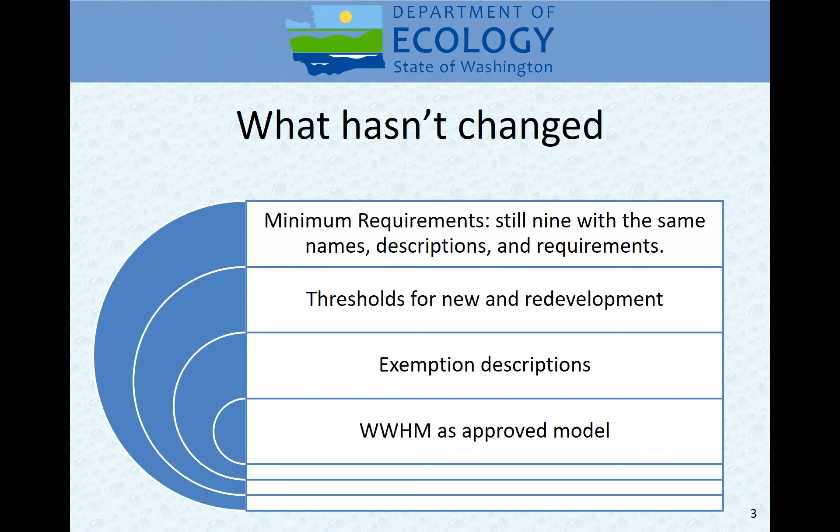What else hasn't changed? Our runoff treatment, flow control, BMP design criteria. You still have to have a swale that's 100 feet long. You still have to have a wet pond with the 6-month storm storage volume in it.

The side slopes have to be the same. You have to have the 2 different basins as you're dealing with that. We have not changed those things. We haven't changed it for bioretention, we haven't changed it for permeable pavement. Those are all the same.

The location in the manual where those are described has been changed for many of them. We did have cases in the 2014 manual where you'd go into volume 3 and look for a BMP, and it would say go to volume 5 to find the design criteria for this.

And other BMPs, you'd go into volume 5 and it would say go to volume 3 to find the information. We have eliminated that. We now have all the design criteria for all the BMPs.

Flow control and treatment are all in volume 5 now. Volume 3 talks about how to select BMPs, not how to design them, but how to select them.

And how to do the hydrologic analysis, how to run WWHM, what the different design storms are, that kind of information. So the BMP design criteria is in volume 5 now.

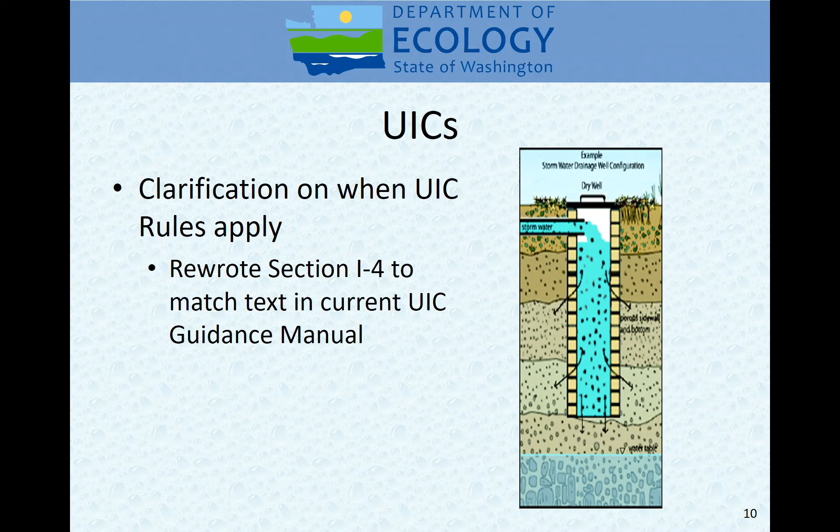In the edits we've done here, we've identified how you determine what level of treatment you need before a UIC, because we're not doing minimum requirement 6 for treatment—we have to do treatment some other way. We've done some pollutant loading and treatment capacity combinations, because that's what determines how much treatment you need.

We've also looked at the fact that if we put UICs in areas with public water supplies, we may be contaminating those supplies, and the Department of Health doesn't like that—nor do the public water suppliers. So we are putting in some requirements to help protect drinking water.

So the location of UICs is being controlled, particularly the deep UICs—the ones that go through that impermeable layer into the lower vadose zone. We're looking very carefully at what happens there, and these have to be registered with Ecology. Mary Shaleen-Hansen at headquarters is the Ecology lead for UICs, and all UICs being constructed in the state of Washington have to be registered through her. She reviews your UIC registration application.

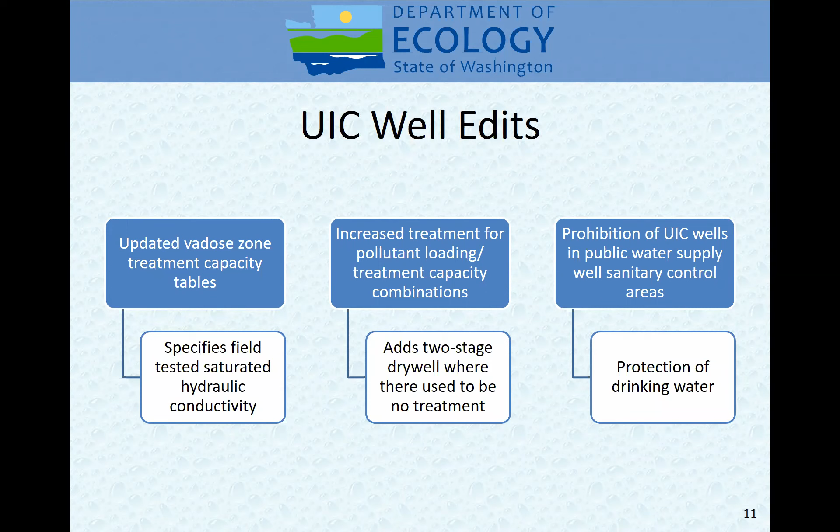So for deep wells, we've gone to great detail to make sure they're fully specified. We have a group of people that meet regularly with the Department of Health and other concerned entities to make sure everyone is happy with the rules we put in place for UICs. These rules may get adjusted as time goes on to better protect groundwater, because we don't want to contaminate groundwater with stormwater. So we're doing lots of things to make sure we're meeting those requirements.

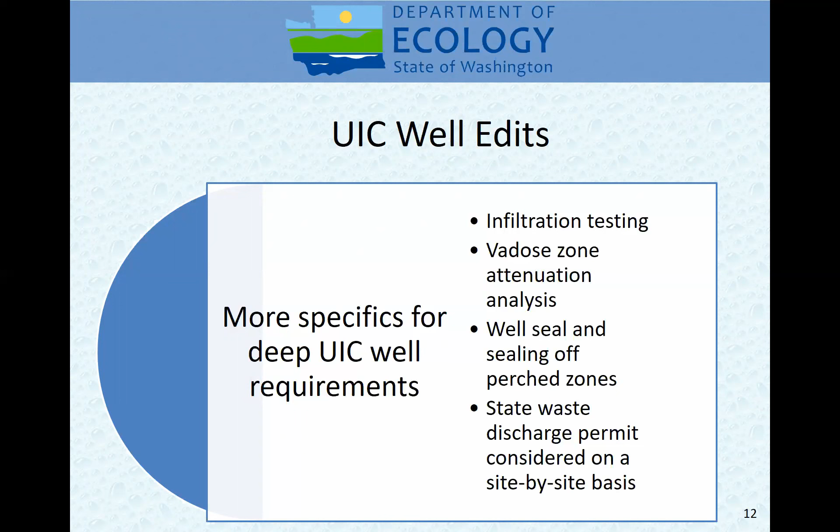If you want to build a UIC, you need to register it, and you need to apply for registration at least 60 days prior to building it. The old rule allowed them to build it and then apply, and that's too late for us to stop it. So now you have to apply up front. And if you have a deep injection well, that means there's going to be a conversation with Department of Health and any concerned water purveyors that may be down gradient of that well, so we need that extra time to do our evaluation.

And we have an online search site to help you identify where you may have problems with UIC wells.

So why are we doing this? We recognize there's confusion between the rule and the manuals, and we wanted to clarify that. We want to better clarify when UIC guidance is needed. Industrial permits refer to the manual, and industrial permittees use UICs, but they didn't refer to the UIC guidance document, they referred to the manual. So we needed to have it in the manual, if nothing more than saying here it is, you have to go look in this place for the guidance. We felt it was better for us to put it in the manual, and so we can now eliminate that guidance manual.

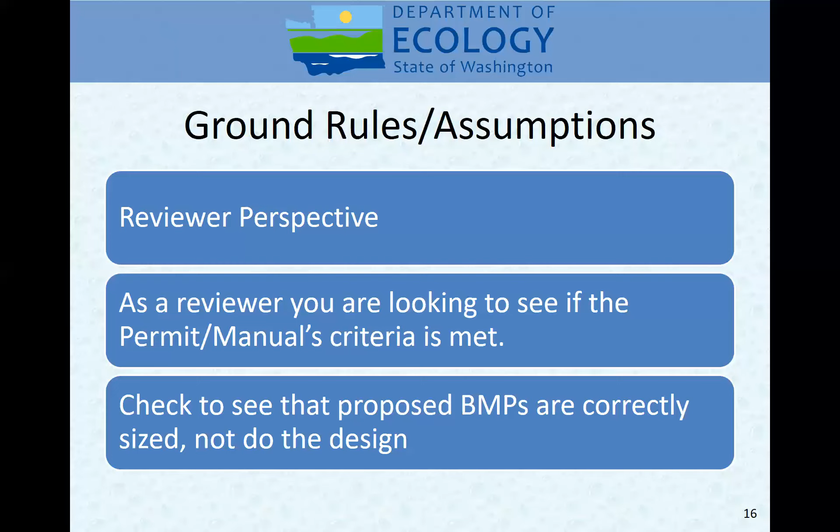And this development causes problems with streams, water quality and flow. It erodes the stream sides, it puts pollutants in there, it brings pollutants in to kill the salmon, which in turn can't feed the orcas, which alarms people across the country that our orcas are dying, and we want to stop that from happening. We want to do everything we can to stop that from happening. What we want to do is make things look like it was pre-development.

We know we can't do that completely, but we are doing what we can by controlling new development and redevelopment to the extent we can, and by having grants within ecology to jurisdictions to build runoff flow and treatment, water quality treatment BMPs on areas that currently are developed but don't have those BMPs.

And what we are focusing on primarily is trying to get as much water back into the ground as we possibly can, as close to where the rain falls. So we are focusing back on the site of development, and we're trying to get new development and redevelopment to infiltrate runoff on their site.

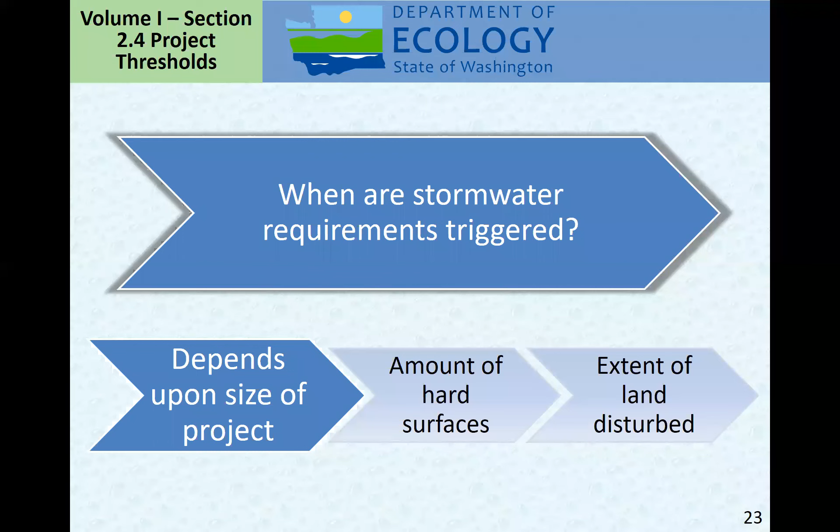The amount of hard surface is what you use for the size of the project and the extent of land disturbed. So if all you're going to do is cut down 3 acres of forest, you're exceeding the minimum requirement for new development, and you have to meet all 9 minimum requirements for cutting down those 3 acres. You don't have to be putting down impervious surface to trigger minimum requirements—you may get there just by doing some permeable products.

Now if it's a new development, you look to see if you're adding 5,000 square feet or more of new or replaced hard surfaces. If so, you have to do all 9 minimum requirements for all the new project surfaces.

If no, here's where we look at the permeable surfaces. If you've converted 3/4 acre or more of native vegetation to lawn or landscape, or 2.5 acres of native vegetation—forest, for example—to pasture, which is essentially what you'd do when you cut down trees, you answer yes, and you have to do all 9 minimum requirements.

If it's no, now we're looking to see if you have more than 2,000 square feet. If you're between 2,000 and 5,000, you have to do minimum requirements 1 through 5, not 1 through 9. And if you don't have that 2,000 square feet of land disturbing activities, you only have to do minimum requirements 1 and 2.

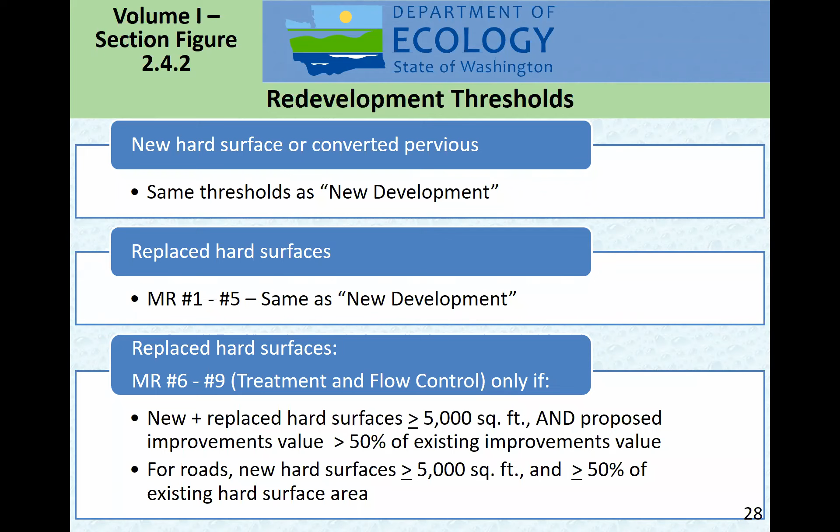Confusing, hopefully a little less confusing now. Questions on how you select minimum requirements?

And Doug, there are a couple questions in the Q&A box. Okay, you want to read them? Yes, first one actually goes back to UICs.

It says, are all sites that fully infiltrate required to obtain a UIC permit regardless of dimensions of infiltration facilities?

If you are installing a UIC, a dry well, or an infiltration trench, or storm chambers - those yellow half cylinder chambers that you can put under a parking lot that infiltrate through the bottom - those are all UICs. If you're installing those, you must register the UIC. Approval of those UICs as flow control.

What we're suggesting to jurisdictions is that even if somebody is planning to do 100% infiltration with flow control using UICs, the jurisdiction should review that submittal, because if the UIC fails, the jurisdiction is going to receive water. So we want to make sure the jurisdiction knows where UICs are being installed and is aware of the potential for having to deal with overflow. But registration is required for UICs. Hope that answered the question.

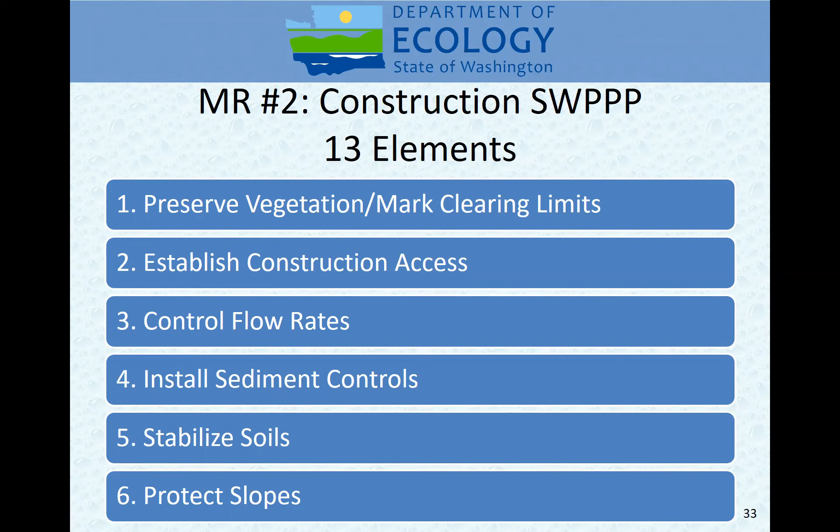You need to control flow rates within the site and off the site. You need to control sediment. The construction permit is primarily dealing with turbidity, with dealing with sediment in the water leaving the site. So you need to be worried about the movement of soils. So you need to stabilize soils, need to protect slopes to make sure they don't go anywhere.

Drain inlets that are on the site, so that there's drain inlets being built for that project in a subdivision. Those need to be protected from getting silt to them during construction. Or if it's off-site and water's draining off-site, the catch basins off-site need to have protection. The channels and outlets need to be stabilized so they don't erode.

Controlling pollutants is some source control type things, making sure that if you have gas on site in tanks, that those tanks aren't leaking and you're controlling where the water is going.

If you are having to do dewatering, if you have high groundwater and have to dewater, you need to be sending that dewatering water to a safe place, whether it goes and gets dispersed out on the property someplace, or it gets discharged to a collection system, the MS4. You need to deal with that water.

Elements 11 and 12 are managing and maintaining your BMPs. So if you put them in up front and they fail, you got to rebuild them. And you need to manage the project to make sure that the BMPs for construction are in place before you start disturbing land upstream. And when we added minimum requirement number 5 in the 2014 manual, we added element number 13, which is to protect LID BMPs.

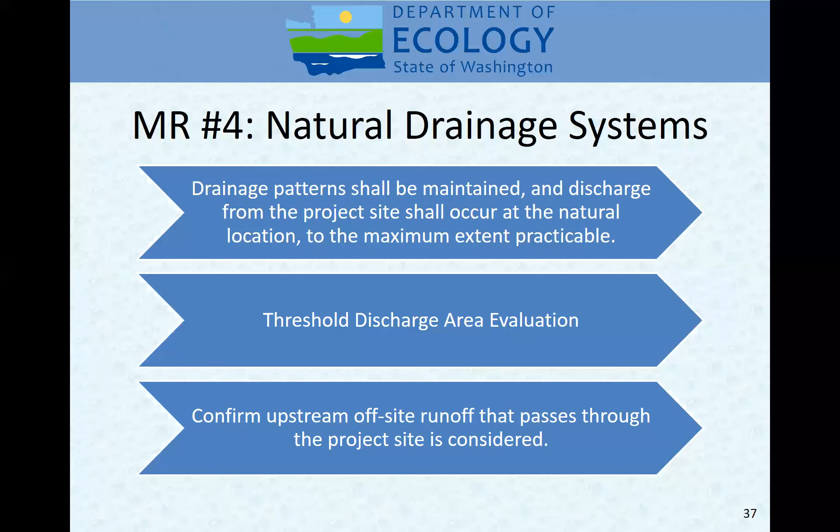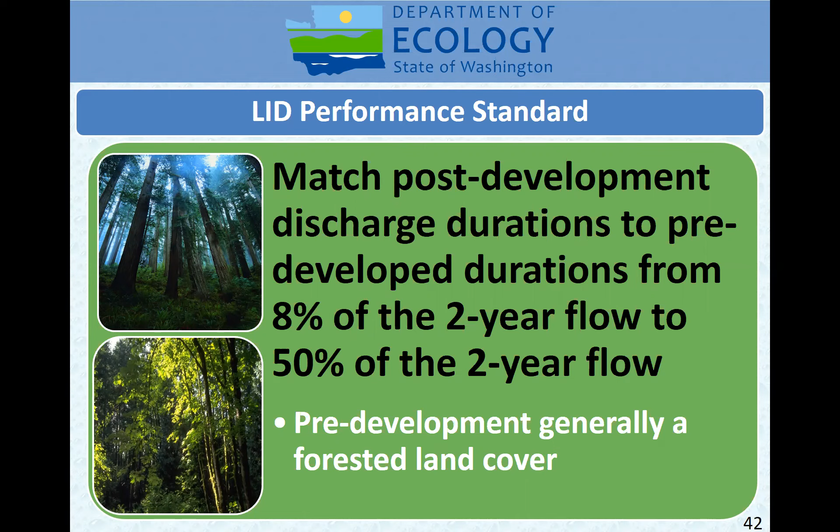So 60 years times 365 days a year times 24 hours a day times 4 time steps per hour, 4 15-minute time steps per hour, and you get multi-million time steps. And WWHM takes the pre-developed condition and calculates the runoff from the site in each of those 15-minute time steps.

And it takes the post-development runoff from the site in those 15-minute time steps. It then sorts that runoff from highest to lowest and calculates the amount of time that that specific flow rate is exceeded. So if you take the maximum flow rate, you find out that that's exceeded 0% of the time.

And then you take the next one and it's exceeded 1 over multi-million converted to percent of the time. And it works its way on down and down until it gets into this range of 10% of the time, 1% of the time, 0.1% of the time, 0.01% of the time. And it then plots that flow rate versus the percent exceeded on the graph.

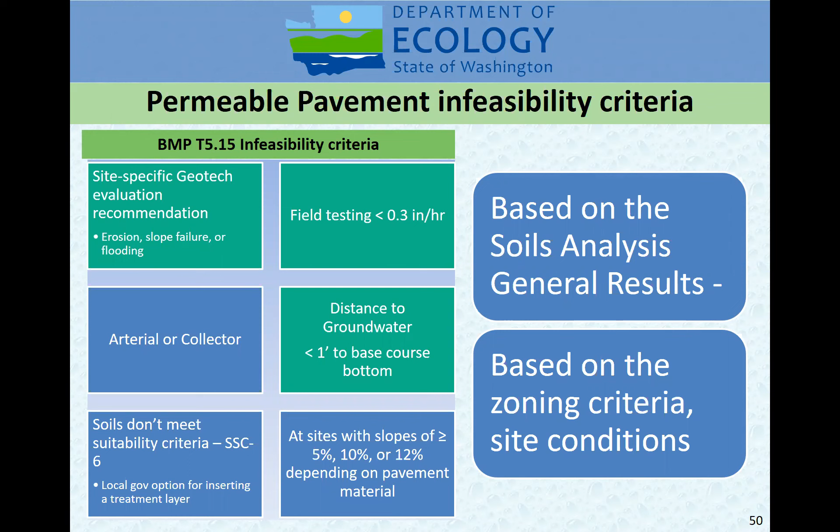And again, if you answer no to all the various different infeasibility criteria, you have to install permeable pavement. If I go back up to here, if permeable pavement, rain gardens, and bioretention are all infeasible, then you need to do flow dispersion.

So you need to take runoff from the roadway or the patio and disperse it across grass. Or you need to collect water that's coming down from the roadway, from your driveway, and collect that and disperse it across grass. Sheet flow and concentrated flow dispersion.

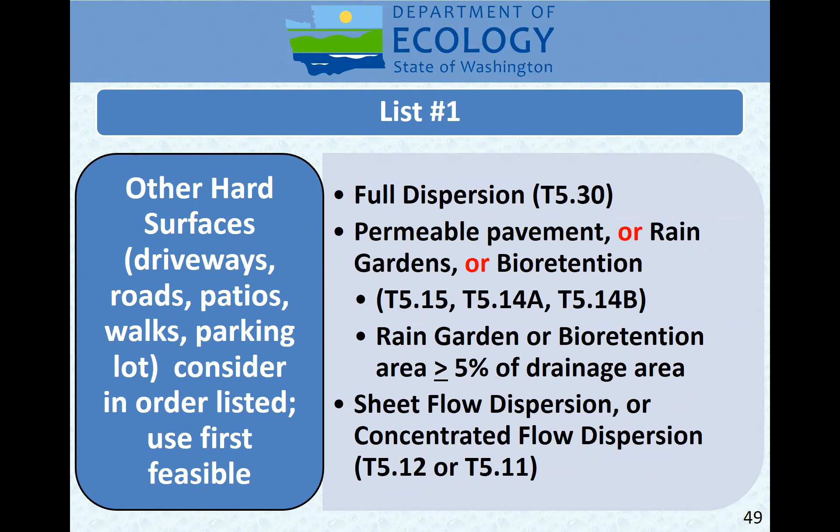Those are situations where we've put those into the manual back in 2009, but we can't take them out in the next manual. That's called backsliding. So we had to keep them in, but we kept them at the bottom of the lists so that they're still there, but hopefully you have a property that is going to do something higher up on the lists.

Now, if you have to do minimum requirements 1 through 9—I was just telling you about minimum requirements 1 through 5—if you have to do 1 through 9, there's a list 2 that you're doing. And what are the changes? It's the same as list 1, except rain gardens are no longer an option.

If you have to do 1 through 9, you have to do treatment, and rain gardens aren't designed to give us a known amount of treatment. Bioretention does—we've done tests on the bioretention media, and we know what kind of treatment we can get through the bioretention.

We don't know what kind of treatment we can get through a rain garden, because a rain garden doesn't necessarily have the bioretention media in it. You can build a rain garden by scooping out the dirt, setting it aside, stirring it up with a little bit of compost, dumping it back in the hole, and planting plants. That's a rain garden, not bioretention. We don't know what kind of treatment we're going to get from that. So if you have to use list 2, that option is for bioretention only, not for bioretention or rain gardens.

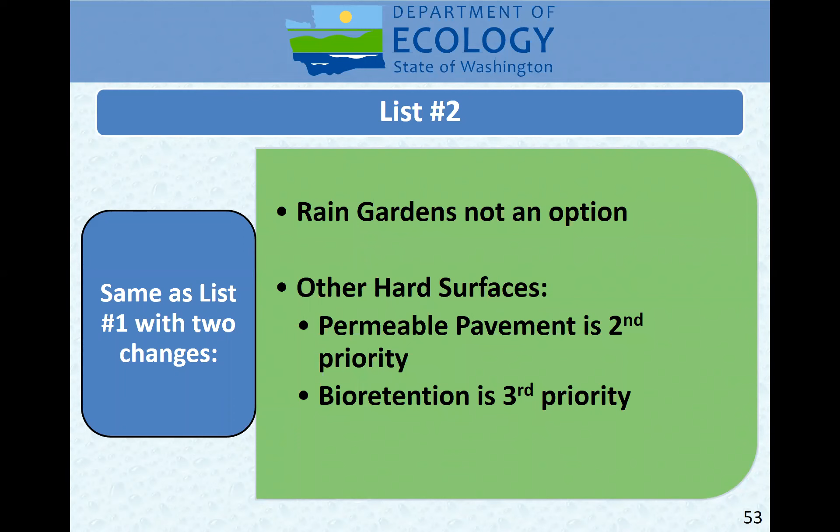So to go through the list, those same three slides I just had once before: lawn and landscape, this hasn't changed. Now in list number 2 for roofs, we only have bioretention as the second bullet. The same first bullet and same third and fourth bullets, no change. And in list number 2, other hard surfaces, permeable pavement is the second bullet by itself, and bioretention is the third bullet by itself. The fourth bullet is the same as it was before.

Now, what happens if everything's infeasible? Everything on those lists is infeasible. You have high groundwater, contaminated soils, you're an industrial site and you don't have enough room to disperse water across grass because you don't have anything there. If everything's infeasible, you're done. You've met minimum requirement number 5. You don't have to do the list option, you picked the list option and you're done. You don't have to do the LID performance standard. If everything's infeasible, you're done.

Now you have to cite the infeasibility criteria that you're using to show infeasibility. So in your stormwater site plan, there should be something that says, I can't do bioretention because my infiltration rate on my site is less than 0.3 inches per hour, and you can find that in the geotech report that I've attached. You can't just say, oh, it's infeasible, I'm done. Jurisdictions need to make sure that the applicants cite the specific infeasibility criteria they're using to show that it is indeed infeasible.

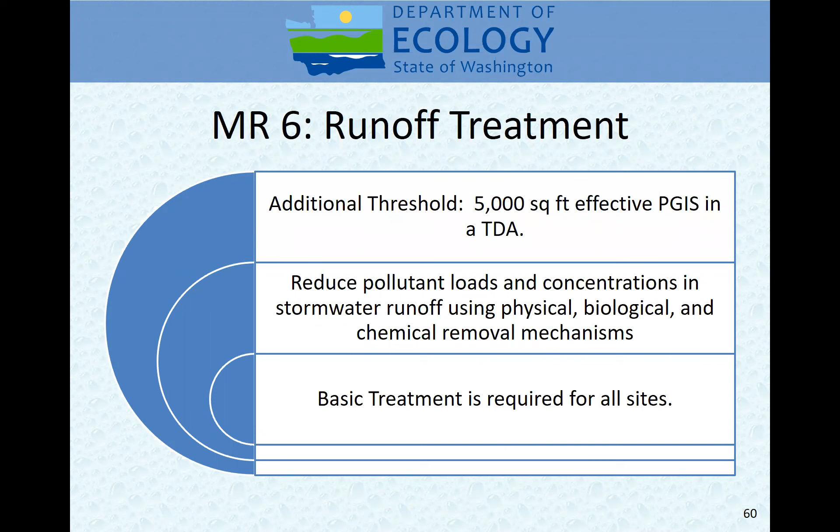Minimum requirement number 7 is the flow control minimum requirement, and it has a second threshold as well: 10,000 square feet of effective impervious surface in a TDA, or a 0.1 CFS increase in the 100-year flow frequency. Actually that should now be a 0.15 CFS increase in the 15-minute time step of the 100-year flow frequency. So those go together, the 0.15 and the 10,000 square feet - it takes about 10,000 square feet of effective impervious surface to increase the flow by that 0.15 CFS. If you exceed either of those, you have to meet minimum requirement number 7.

And these are by TDA again. So if I have 20,000 square feet of impervious surface on my property with 2 TDAs, one with 8,000 square feet and one with 12,000 square feet, I have to do flow control on the 12,000 square foot TDA, but not the 8,000 square foot TDA. But I may have to do treatment on both of those if we have more than 5,000 square feet of pollution generating impervious surface. So it gets kind of crazy.

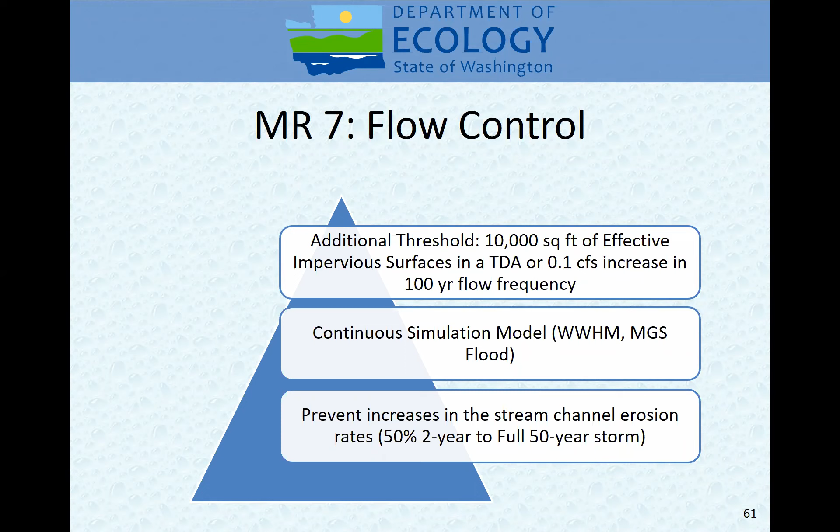Now you use a model, a continuous simulation model like WWHM 2012 or MGS flood, to analyze flow control on this process. Here we're looking at higher flows, bigger storms - 50% of the 2-year to the full 50-year storms, things exceeded 1% of the time or less. So 99% of the storms operate at flow rates less than what this BMP looks at. This is taking the top 1% of flow rates in storms - it's taking the stuff off the peak. I've got another little example of TDAs here; I don't think I need to go over that again unless you want to ask a question at the end.

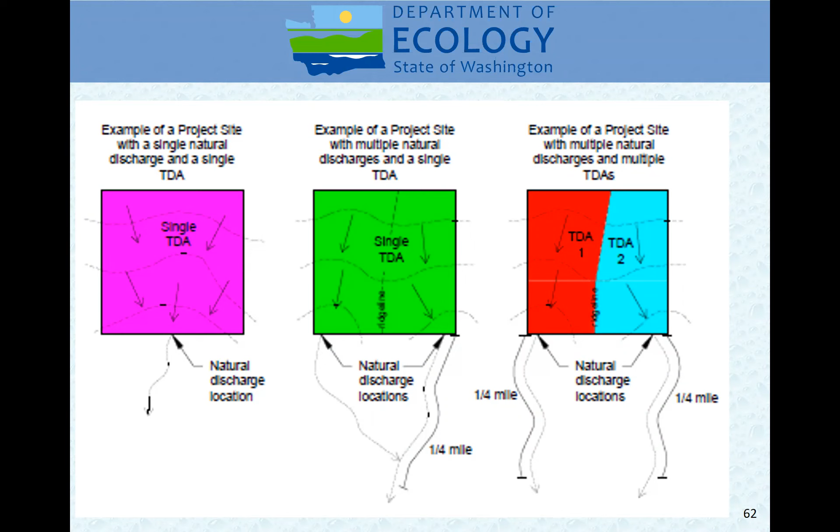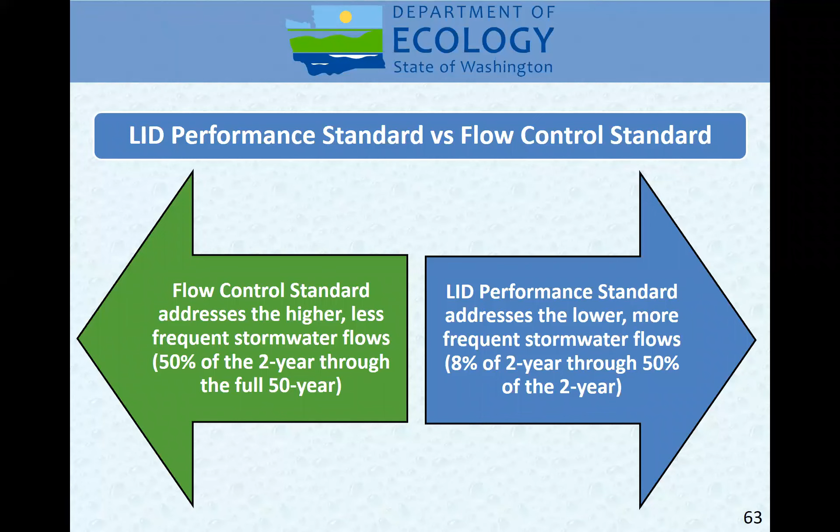So if you look at the performance, LID performance standard versus the flow control standard, there's a dividing line between the two at about the 1% exceeding point, 50% of the 2-year storm. One is 50% of the 2-year storm and lower, down to 8% of the 2-year storm. The other is 50% of the 2-year storm and higher, up to the full 50-year storm. They work together in the same model and on the same graph.

So if I was going to meet the LID performance standard and minimum requirement number 7, the entire red line on this graph would have to be below the blue line in order to meet both standards. Now it's possible to meet one and not the other. If you don't do any infiltration, you're probably not going to meet the LID standard. And if all you're doing is infiltration, you may not meet the flow control standard because your flows may bypass your bioretention if that's what you've got in place.

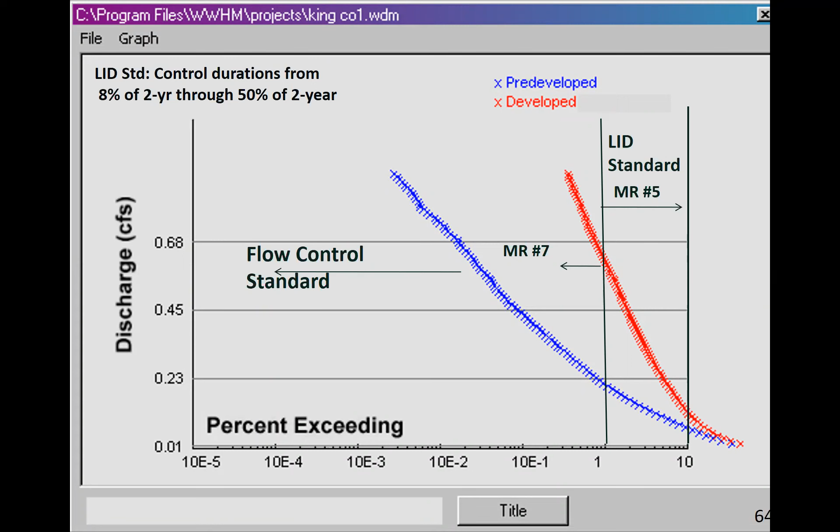So that's minimum requirement number 7. Minimum requirement number 8 is wetlands protection. You cannot use an existing wetland for stormwater treatment or flow control. You must have your BMPs outside of the wetland and the buffer for the wetland. There are some cases with low quality wetlands, category 3 and 4 wetlands, where you can use the buffer to help mitigate impacts on the wetland. But otherwise, all your treatment BMPs and flow control BMPs need to be outside the wetland and the wetland buffer.

We're trying to ensure that wetlands are controlled and get protections, because wetlands are a valuable resource here in the state. And the way wetlands are judged is by changes in volume in those wetlands. Wetlands go up and down in volume based on rainfall and the lack of rainfall. So we're asking people that are discharging to a wetland to make sure that the wetland is protected, not disturbed, and not destroyed.

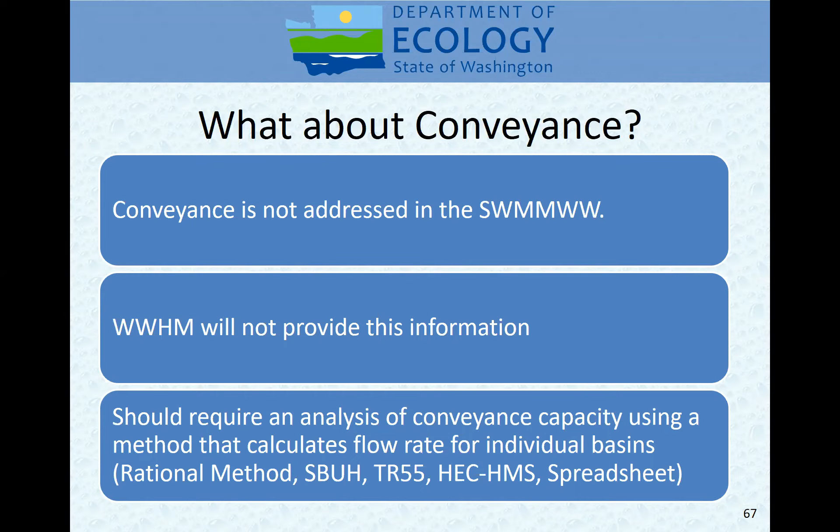Okay, questions? We have one: are there O&M requirements for minimum requirement 3 BMPs?

Yes, and those should be attached to minimum requirement number 3, not minimum requirement number 9, because those maintenance requirements are listed in the source control BMP. So they're already there - you just have to make sure that they're actually doing them.

And that was it for questions. Good question, no one's ever asked that question before. It's a good one. Thank you for asking that, whoever did. Pat yourself on the back.

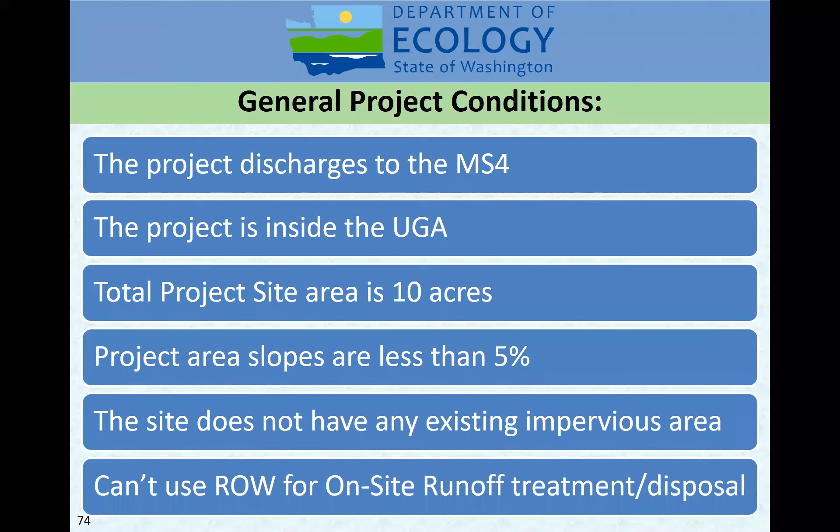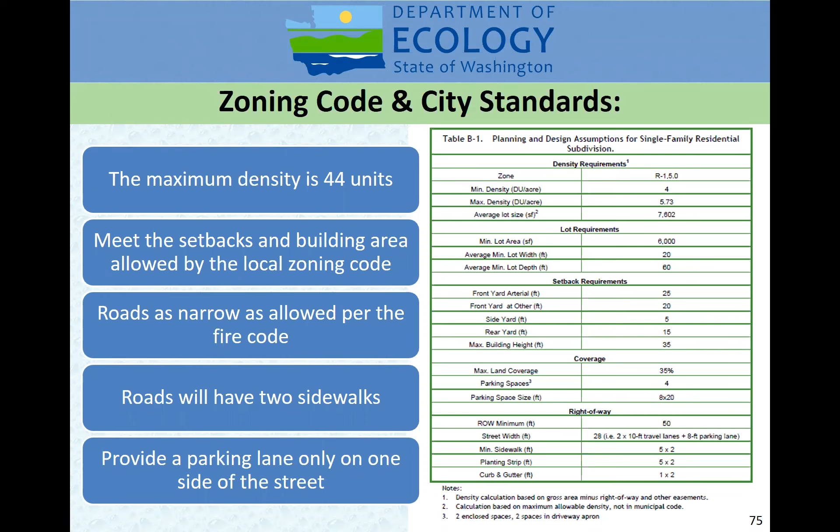Roads, I want to make as narrow as the fire code will allow. I'm going to have 2 sidewalks on my road. I want this to be a pedestrian-friendly subdivision, so I'm putting 2 sidewalks in, and I'm allowing a parking lane on only one side of the road. So 2 lanes for cars to travel, sidewalks on both sides, and a parking lane in the road. So my street width is going to be 28 feet, 2 10-foot travel lanes and an 8-foot parking lane. And I got sidewalks on each side, a planting strip and a curb and gutter to fill my 50-foot right-of-way within my subdivision.

And so now I've had my geotechnical people go out to the site, and they've done the thing that they need to do, and they've determined that the infiltration rate on the site measured in the field is about 0.3 of an inch per hour, 0.3 inches per hour, silty soils. And they did some additional tests, and they found that the existing soil meets the site suitability criteria. They tested the soil and found that there was 5 milliequivalents per 100 grams of soil for cation exchange capacity. And they also found that there is adequate compost in the soil, organics in the soil, to meet the site suitability criteria that's listed there.

And because the infiltration rate's 0.3, it is low enough, so the water will not go through the soil so fast that it won't have time to come in contact with the organics or the cation exchange capacity. And depth of groundwater, they did drillings and they stopped at 15 feet and found no indication of groundwater within that 15 feet. So I've got more than 15 feet below ground surface.

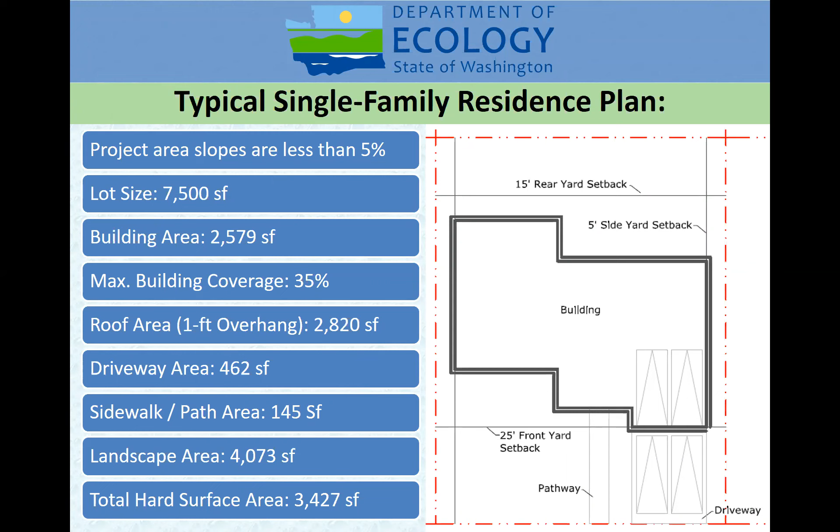And so now we're going to move to the next step and identify the minimum requirements. The first thing you need to do to identify the minimum requirements is get your numbers of areas - how much new and replaced impervious surface you have, and what's going on.

And so I'm taking from that previous table. I've got my per lot numbers here of landscaping and rooftops and driveways, sidewalks and paths. I'm going to multiply those each by my 44 lots to get a... excuse me, I've got a cough here. Had to go on mute so I could cough and not knock all you guys' headsets off.

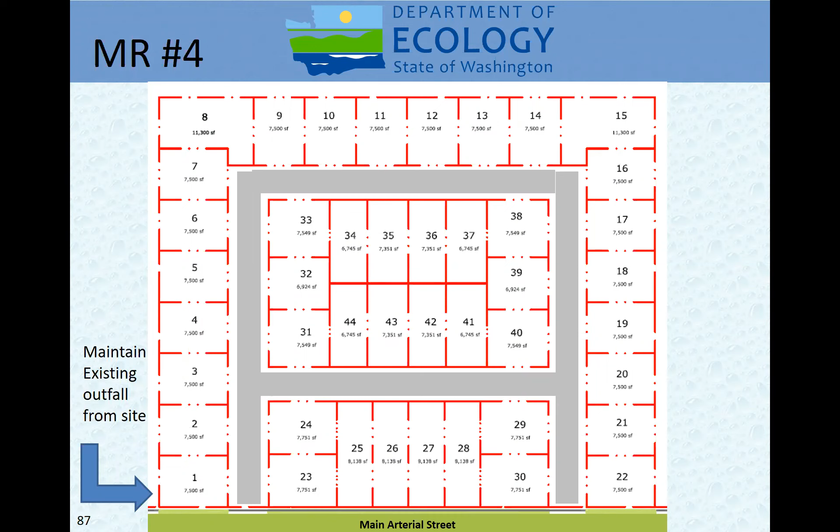So now let's get into the technical side of this. First question: you need to start asking some questions about minimum requirement number 5 before you start putting minimum 5 together. First of all, is the LID performance standard required?

That's required on projects that are outside the UGA and are on 5 acres or larger. So if you are on a project outside the UGA on 5 acres or larger, then you must do the LID performance standard—the list option doesn't count. King County has done some pre-sizing for properties outside the UGA and on 5 acres or more. They've done some sizing of bioretention that meets the LID performance standard, which is larger than the 5% we're asking for in the list option.

So people can meet the LID performance standard without having to run the model, because King County has already run the model and identified how big the BMPs need to be based on how much area is draining to that BMP. They can size it, and the size they build it will meet the performance standard. So there is a way of dealing with this without having to get an engineer involved on these properties, but it takes some effort on the jurisdiction's part.

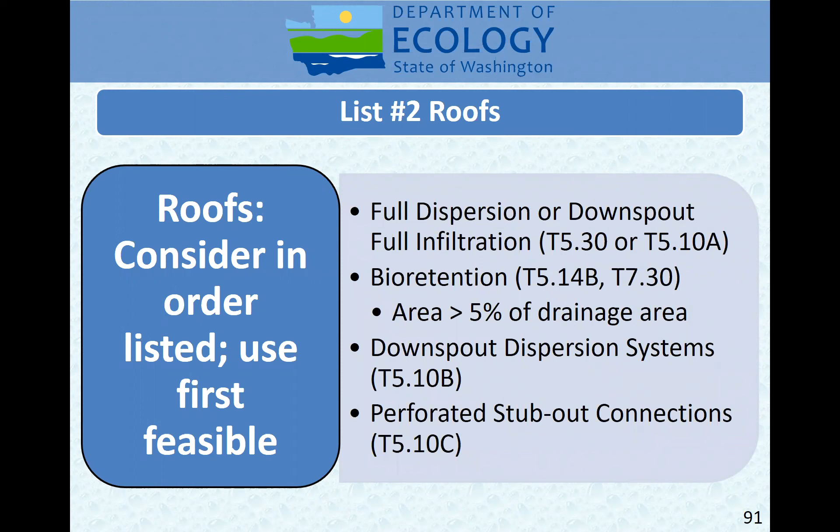Now we've set that aside, gone over it, and put a sign on the wall. So, lawn and landscape: we're doing soil quality and depth. For roofs: we're doing bioretention. Now, continuing list 2, for other hard surfaces, we're not doing full dispersion.

The next item on the list is permeable pavement. Is permeable pavement feasible? Well, most of the things that make bioretention infeasible also make permeable pavement infeasible, and conversely, the things that make them feasible make them both feasible. So bioretention is feasible, permeable pavement is typically feasible as well. You need to look at the ability of the existing soils to treat, and site suitability criteria applies there.

So I don't have that infeasibility. I'm not building a parking garage. This roadway, these 44 properties, I probably won't have more than 400 ADT - well, it might be close, but it's going to be less than 400 probably. We're not going to have 9 trips every day for every house. I don't think so, it's probably not going to be 400. And so we can do permeable pavement.

That has to be done. We don't go to bioretention, we don't have to go down the list to the next one. We've identified what we want, so now we're going to stick it up on the wall. For other hard surfaces, we're going to do permeable pavement. So here's what we're going to do to meet minimum requirement number 5.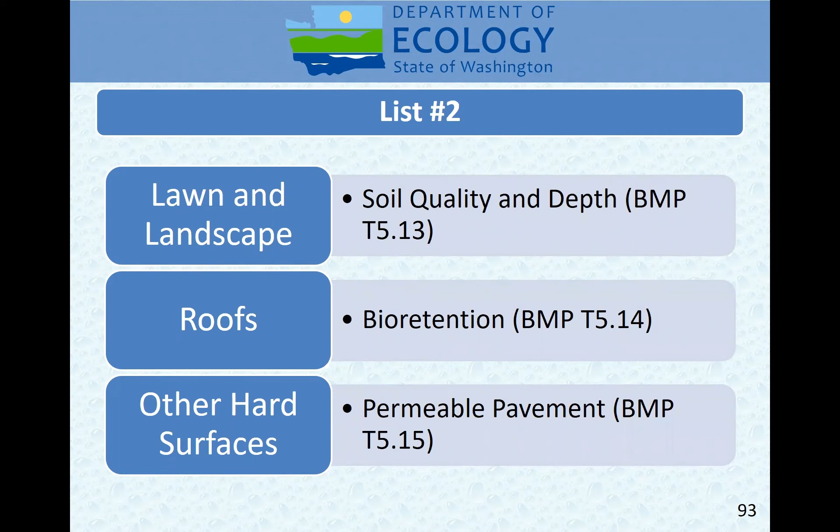So here's what we're going to have to come up with on-site. BMP T5.13, soil quality and depth. We're going to have 141 square feet of bioretention on each site - that's 5% of the roof area at 2820.

We're going to have permeable pavement driveways, and we're going to have permeable pavement roadways. But on site, we're doing permeable pavement driveways. Any excess runoff is going to get collected on the property boundary by the road. And so if there's overflow on the property, it's going to go out into the road, and that's going to get taken care of by what we're going to do for the full subdivision.

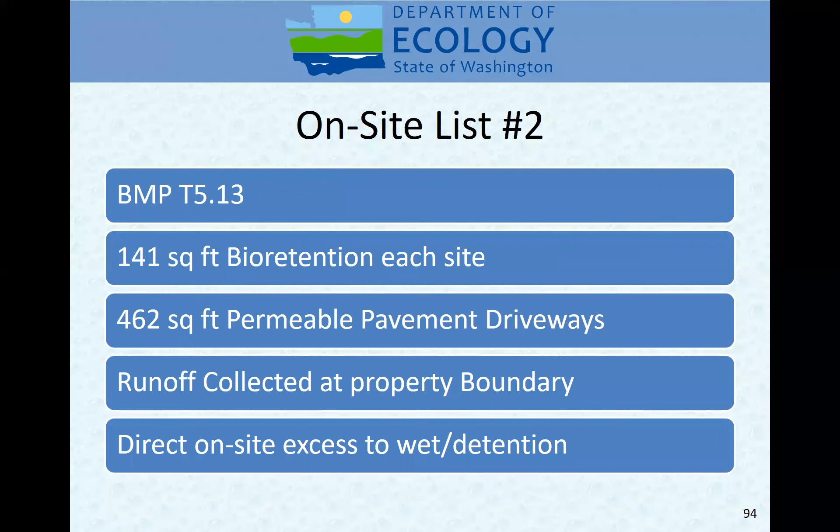And so project-wide, we need to have permeable pavement roadways, the third item down here, because that was feasible under minimum requirement number 5. So the roadways now have to be permeable pavement. The sidewalks have to be permeable pavement because those are other hard surfaces - they need to be permeable pavement.

And now, because I'm not taking care of all my runoff, my bioretention probably isn't big enough to handle all the runoff, all the treatment I need. I may have to have some other treatment added on. If I do, I'm going to build a combination wet pond detention pond to do that extra bit. And we find that out when we run WWHM.

We can run WWHM and just put in the BMPs that we need to have for minimum requirement number 5. And then we look to see, does that get us minimum requirement number 6 and minimum requirement number 7? If it doesn't, we have to add some sort of treatment in addition, and flow control in addition.

So on my sites - every site's going to have one, and it's not going to necessarily be in this spot, but I'm putting a typical drawing together so that whoever's laying out the buildings, the homes that get built in the subdivision, they have a place to look to see what has to be done from a stormwater perspective.

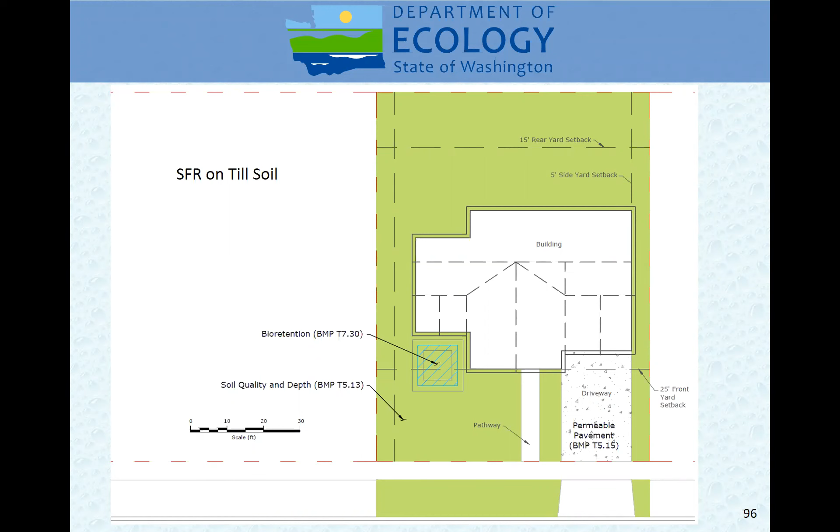So this drawing shows I have to have a bioretention facility, and that bioretention facility should be at least 141 square feet at overflow. My driveway is permeable pavement, and I'm putting soil quality and depth on the rest of the property that gets disturbed that isn't built on. And down here at the bottom, I have the sidewalk going by.

And then if I need to, I've got it set up so that I'm going to drain everything to the southwest, and build a wet detention pond, however big it has to be. I've taken up 4 lots here, which is a lot of area, and I don't think I need that big an area, but I'm setting it aside just in case. If I don't need it, then they can build on the lots I don't use.

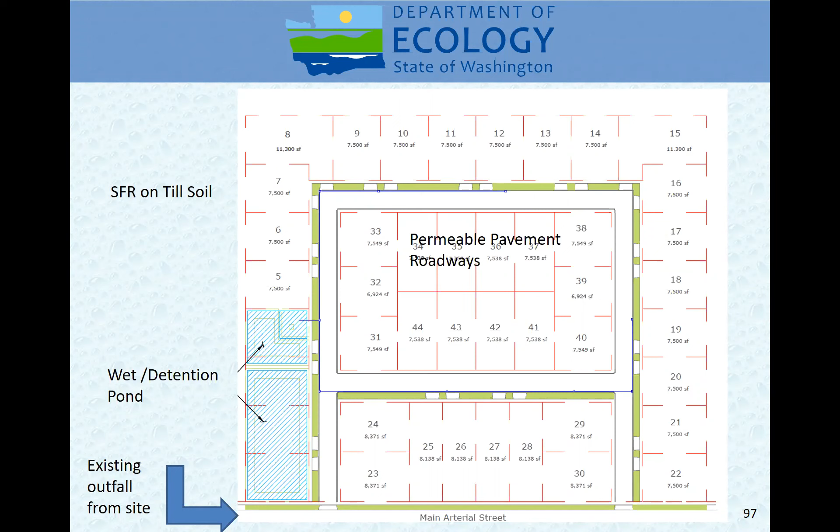So I've created this little figure here to help me with my WWHM analysis. So I've got the things that are going on in the parcel, I've got things that are going on in the right of way, and I have things that are going on in terms of a centralized treatment facility of some sort - if I need them. That centralized treatment facility, I don't know.

And so in my parcel, I have permeable pavement driveways, and each one is so many square feet, and I have 44 of them, so I have 0.467 acres. And I have 2.84 acres of roof, and that roof goes to bioretention - that's 0.142 acres. And then overflow for that bioretention, if more water comes at the bioretention than it can infiltrate, I'm going to overflow onto my lawn. And if it overflows off that lawn, it's going to overflow onto the sidewalk.

And then overflows from that go on permeable pavement, and overflows from that go onto a lawn that's between the sidewalk and the roadway. The roadway itself is permeable pavement. And then there's an overflow perspective: if that permeable pavement can't handle all that runoff coming to it, all the overflows from everybody else, it's going to have to go into some sort of combined facility. And that 0.263 acres there, that's the square footage, I assume, for the pond size.

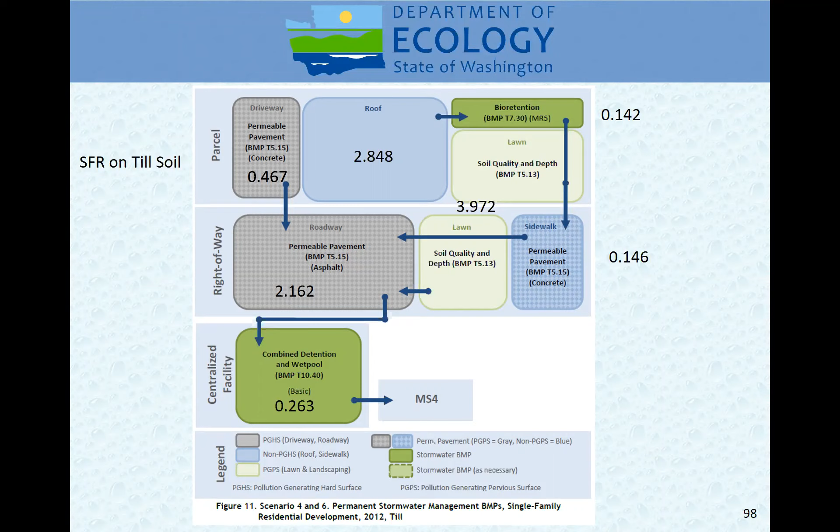Okay, so I've identified what I need for minimum requirement number 5. I've identified that I may need something more to meet minimum requirements number 6 and 7, and I'm putting that into my model. So now, to make sure I've got the right sizes, whether they're big or small, I need to start running WWHM.

So here's my WWHM input file. I've got my roof runoff going to bioretention, and the overflow from that goes out to this wet detention pond. The landscaping on the properties, home sites, overflows and goes to the wet detention pond. The driveways, same thing, and the streets and sidewalks all end up in that wet detention pond. So that's my point of compliance, and I need to make sure I've got all the treatment I need at that point, and all the flow control I need at that point.

So I'm going to run the model, get it output, and I'm going to run it over and over again as a design engineer, trying different sizes and whatnot. So I finally came up with my final sizing, and I've completed all my final sizing.

You can get a report in WWHM, and what I'm going to be showing you is the PDF report. It's checked here for draft with this picture - that checkmark for draft just puts a watermark of draft on your output. If you uncheck that, it leaves the watermark off, and if you click it for draft, you get the watermark.

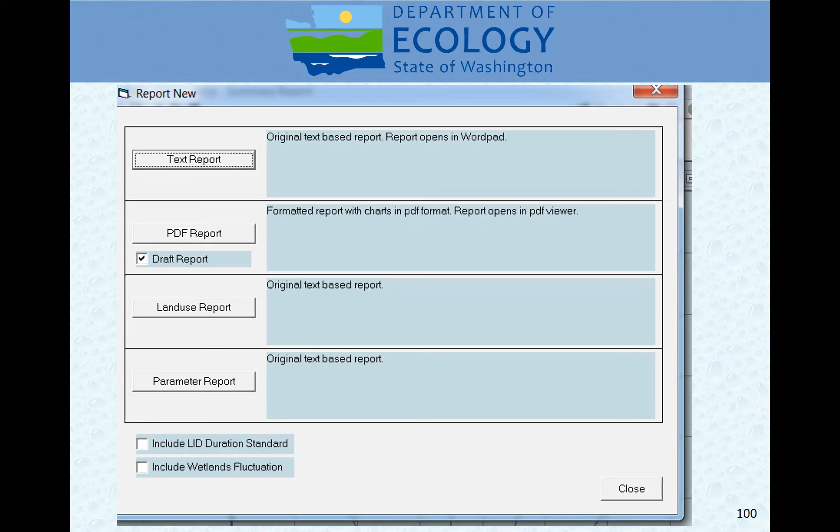So let's walk through that output, because that is what the reviewer is going to have to look at to determine if this is meeting the requirements and how big things are and what's going on.

So my first step is I've got a name for the project, and I did this back in 2016 for a class I was going to do in Anacortes, as a matter of fact. So I used the Burlington gauge, 15-minute time step, and that precipitation scale means for the point where I put this project in Anacortes, you have to take the rainfall at the Burlington gauge and multiply it times 0.83.

To get the rainfall you would actually see at this point - that is done automatically internally when you bring up WWHM and select the county that you're in, and click on the point where you want the project to be. That finds the gauge and finds the precipitation scale. It then looks at the various other pieces and brings those in: the start date for the data, the end date, what version of the manual or model I'm using, and so forth. So that's the first thing that's going to come up.

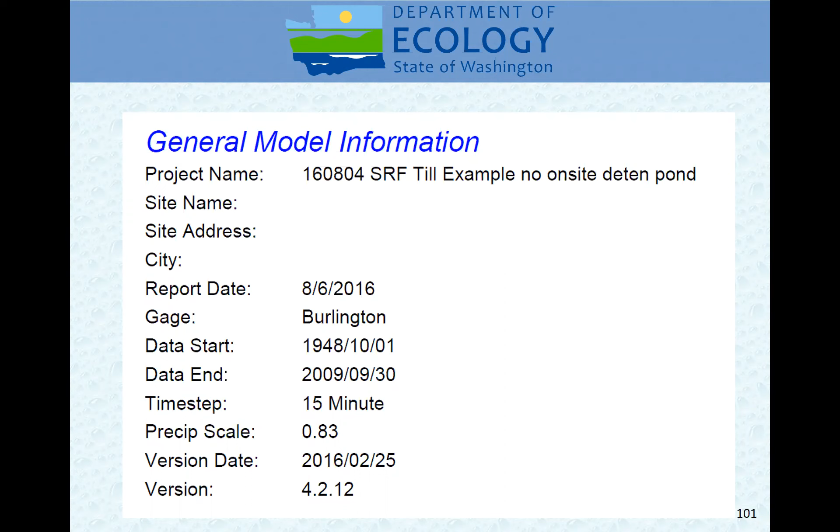And now I'm starting to pick up the pieces that I entered. So I've got C lawn, moderate slope - I'm somewhere between 5 and 15%, that's moderate. I have 3.972 acres, and this flows to the pond. So runoff - anything that doesn't infiltrate here or stay there because of the low storms and the fact that we put soil quality and depth on the site - this C lawn does reduce the amount of volume, so the volume of rain that falls doesn't all run off. Some of it stays, and so this is allowing stuff to stay, but it still gets into the pond.

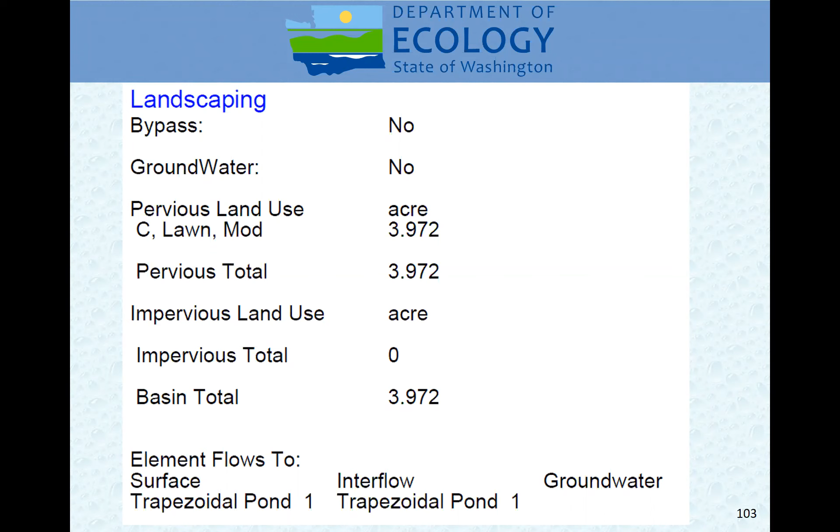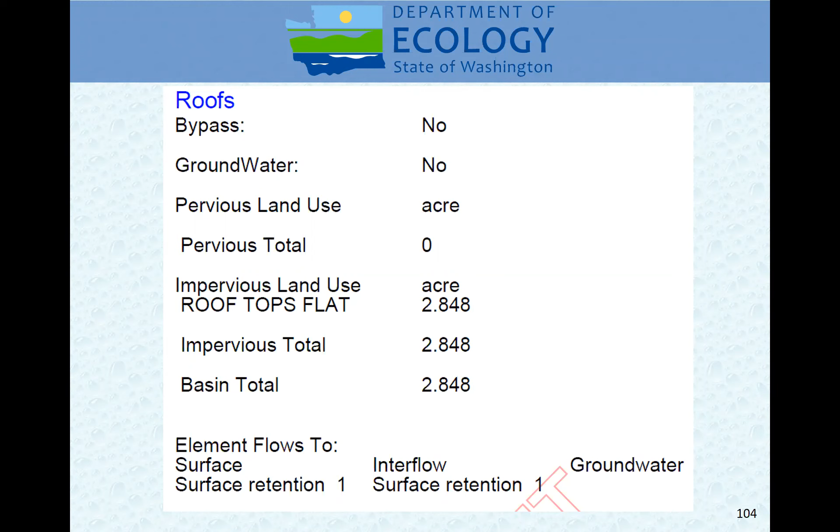And now my next one is roofs. I don't have real high peak roofs, so I'm calling them flat. Here's my area, and it's going to go to surface retention number 1. So any runoff from the roof is going to go into surface retention 1, and surface retention 1 is this bioretention facility that's identified here.

And I've taken the 44 bioretention facilities, 144 square feet, 141 square feet each, and multiplied them and come up with a square footage, and then took the square root of that and came up with a bioretention facility that was 79 feet by 79 feet.

And I made my side slopes 0. So this is the area at the overflow. I didn't have to calculate a different bottom width and then bring the slopes up at strange angles. I can do it directly this way.

And my first layer is Stormwater Manual 12-inch per hour bioretention soil media, and it needs to be 1.5 feet thick, 18 inches. Then I have 1.5 feet of sand below that, and then nothing below that. There's my infiltration rate, my factor.

And the model shows me the acre feet of water that was infiltrated into the ground from that bioretention facility. So the runoff from the roof went into the bioretention facility, and 286 acre feet over the 60-year pattern infiltrated, yet almost 24 acre feet bypassed it and went to the riser. It couldn't infiltrate fast enough and it overflowed, went over the overflow pipe and just out from under the bioretention facility and away. So we ended up infiltrating 92.3%.

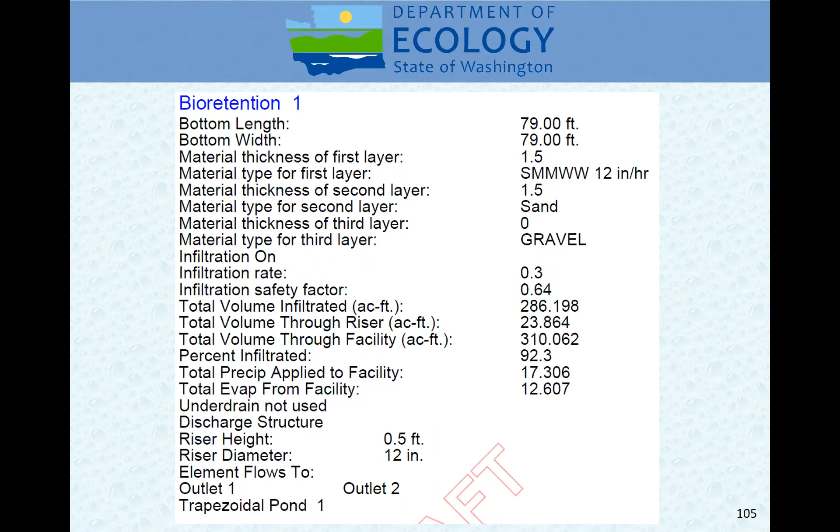The next piece was pavement, driveways. And I took the acreage that I needed to have for the 44 sites, assumed it was 30 feet wide, and calculated how long it had to be. I have the same infiltration rate, the factor, and it infiltrated 100%. No problem from the driveways.

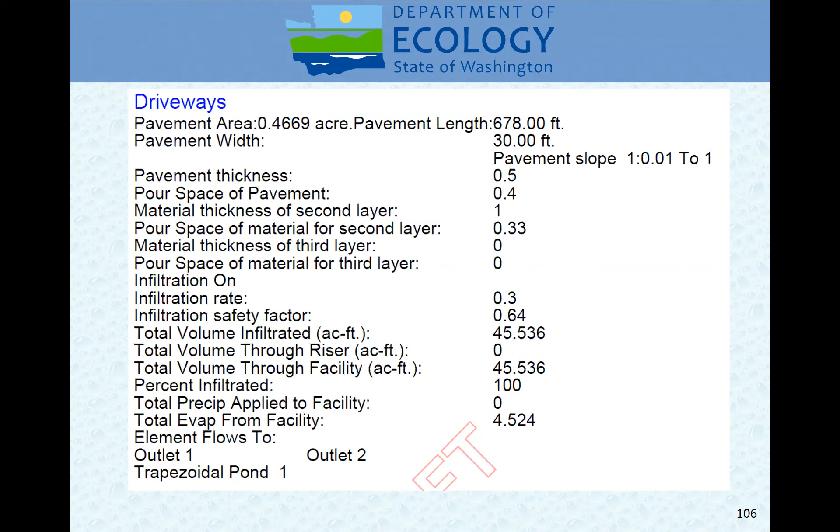And then the streets and sidewalks. I did the same thing, measured the streets and sidewalks, and went to all this effort. And again, the permeable pavement infiltrated everything.

But I still have that 23 acre feet that bypassed the bioretention facility, that I put into a pipe that took me to the ponds. I didn't take it to the street, I took it to a pipe that took me to the ponds.

So now I've created a wet pond below a detention pond. My wet pond is 68 feet by 68, 2.5 feet deep, 3-1 side slopes, which gives me a bottom of my trapezoidal detention pond of 83 by 83. So I'm defining a pond that I'm going to build.

And I don't have to have the exact dimensions. I just need to have the stage storage discharge curve that's correct. So I need to have the change in elevation and the change in volume that happens with my change in elevation go together.

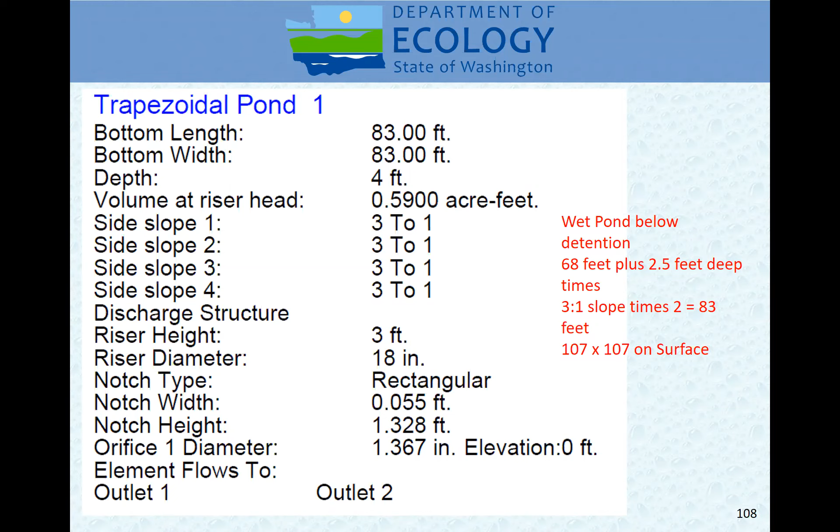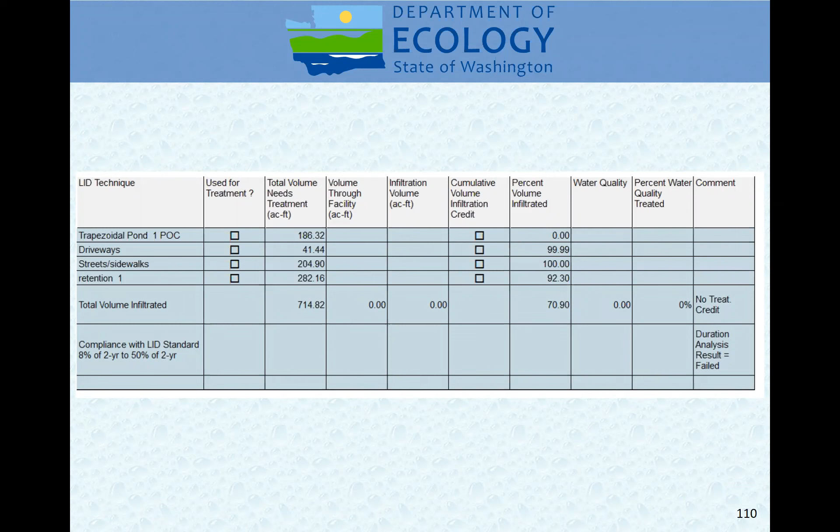And then I hit the water quality analysis button, and it shows me that I needed to have a volume in my wet pond because I didn't treat 100% of the water. I got 23 acre feet of water coming in that bypassed the treatment in the bioretention facility. I still have to treat it.

So my wet pond needs to be about a quarter of an acre foot in volume. It needs to meet that 6-month storm. So that's how I determined how deep that pond had to be and how big the wet pond had to be underneath.

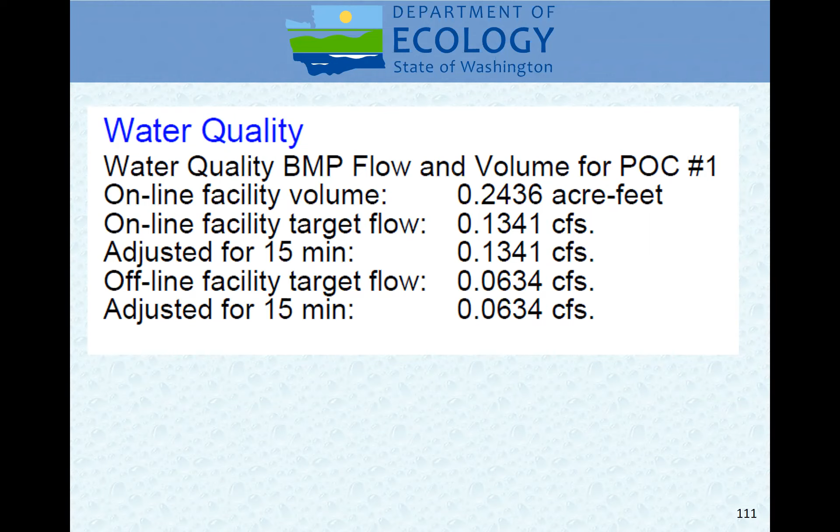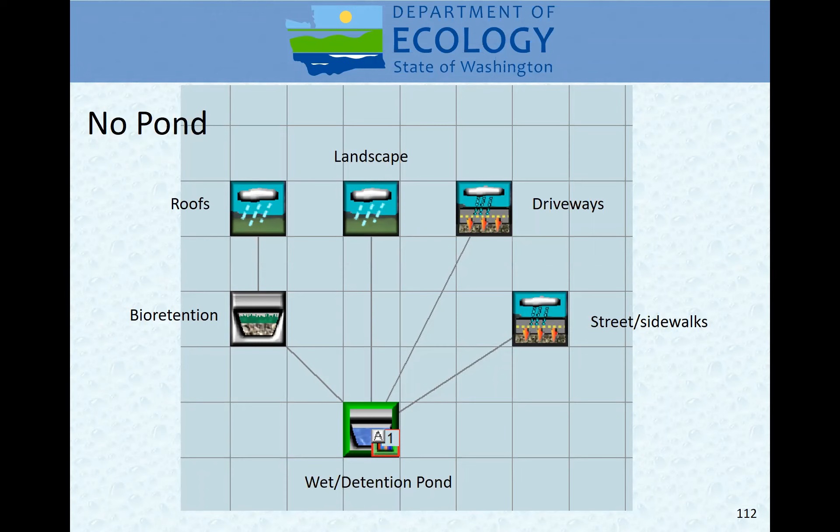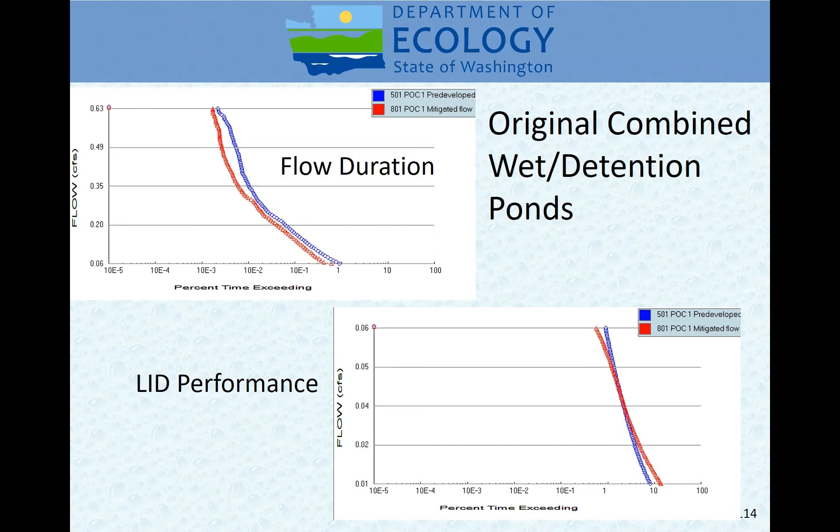So here's that original combined wet detention pond. Now, instead of making them a combined wet pond and detention pond, I made them a separate wet pond and infiltration pond—because you can't have an infiltration pond if you also need a wet pond, and I have a very low infiltration rate here, 0.3 inches per hour. But if I made them a combination of a separate wet pond or BMP of some sort and an infiltration pond, and ran those through the WWHM, for that same size pond I got a big improvement on flow control and met the LID performance standard. I ended up infiltrating everything, which met the LID performance standard.

So when these designs are being done, if you're a design engineer, don't stop with the first answer you get as you work your way through. Try some different things—try making the bioretention in minimum requirement number 5 a little bit larger, and less will bypass. Try to figure out how to infiltrate, even if you have low infiltration—try to figure out how you can get an infiltration pond to work.

Where I live here in the Olympia area, I'm surrounded by infiltration ponds. The soils are pretty good here, and we're surrounded by infiltration ponds, but with the amount of rain we've had recently, there's still standing water in those infiltration ponds. So that's what we're dealing with here.

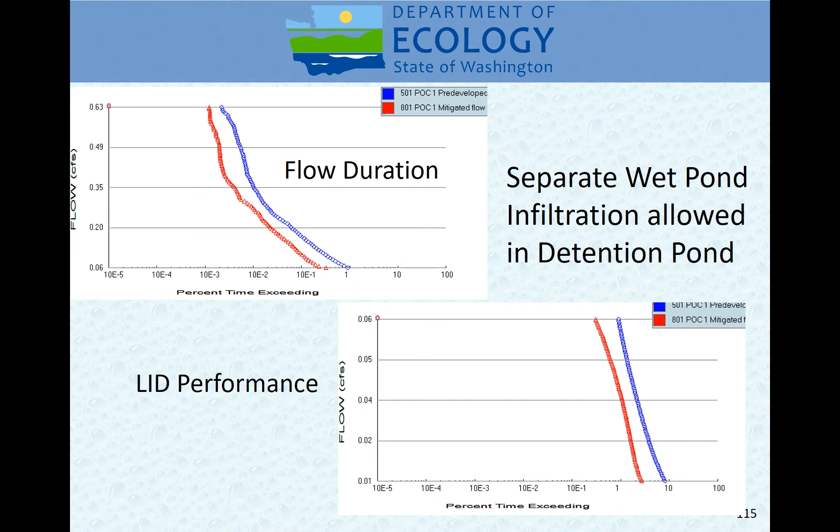So things to do at the end, when they finally come up with something: look for the appropriate BMP. Make sure they're using a BMP that treats what needs to be treated. If they're in a phosphorus sensitive water body, make sure they've got a phosphorus treatment BMP. Go to volume 5 to get the design criteria, and make sure you have the correct design criteria for the various places, and that the facilities have been designed with those criteria.

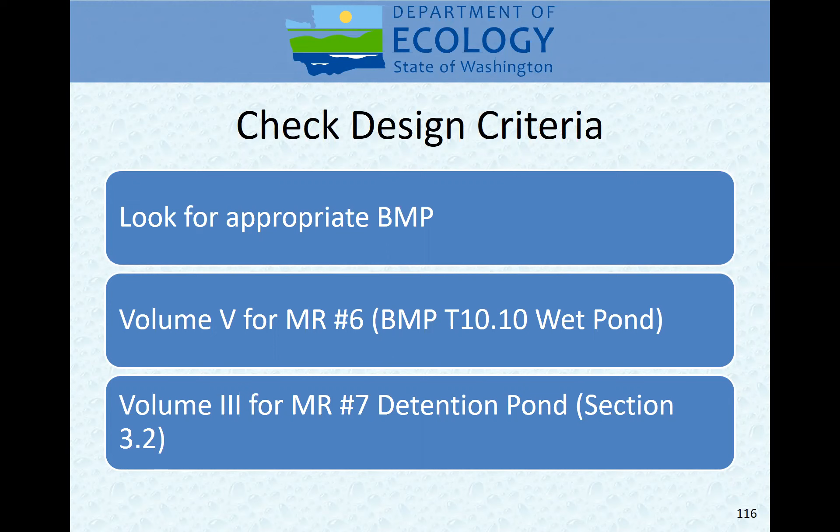And then outside of meeting the minimum requirements in the BMPs, look at conveyance. Make sure they have big enough pipes to handle the design storm in place for your community, whether it's a 25-year or 50-year storm or whatever. Are there potential maintenance issues with what they've done?

They design a roadway to get down to the bottom of the detention pond, a ramp, so you can get down to clean it. Can you actually get access to clean the detention pond? And if they're designing offline BMPs, sized based on offline criteria—which is a lower flow rate—is the splitter box they're using to create that offline BMP adequately designed and sized?

Additional things you need to look at: also check to see if there are wetlands out there. So, questions?

We've got one: are you still allowed to model BMP T5.13 areas as pasture instead of lawn?

That's a good question. I think it depends—if you're going to be landscaping it, you probably should use lawn. If you're going to leave it as more native vegetation, you can probably use pasture. But that's a question the local jurisdiction will have to accept. Ecology would probably accept it either way.

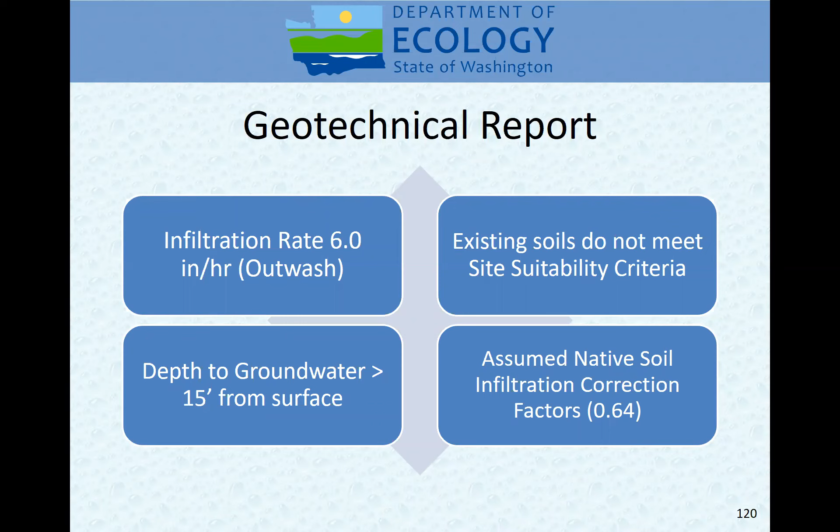I had another thought about that permeable pavement question, and it just disappeared from my mind. It'll come back, I'll get back to that as time goes on.

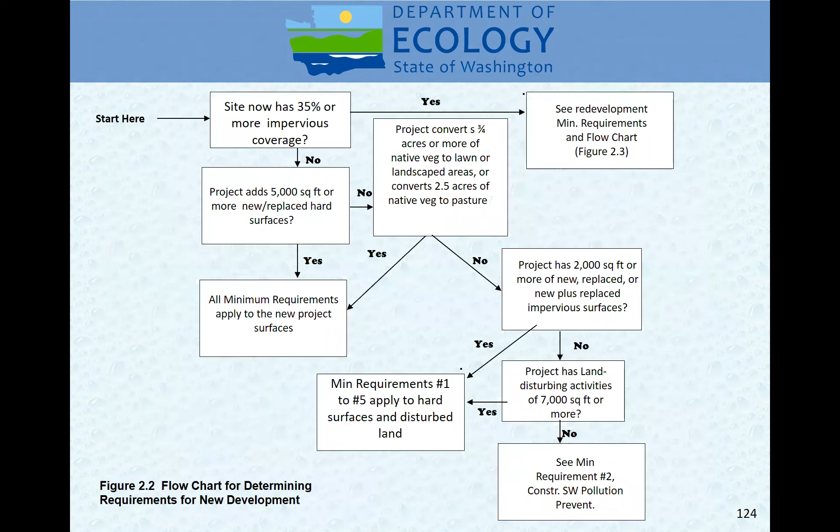And so here's my site again, but now I've got much smaller ponds going down to work on it. Here's my site, the house on my site, my thresholds, exact same table I showed before. Going through the flow chart here, it's the same thing. For a new development more than 5,000, I'll do 9 minimum requirements. So minimum requirements 1 through 4, there's no change, exactly the same as we had before.

Same kind of SWPPP, source controls are not applicable. It's a residential project, maintaining existing flow patterns. I'm going to go on list 2 again, so I'm doing list 2 now. Soil quality and depth, that's still there, and I need to do soil quality and depth. And now let's go to list 2

for roofs, and now downspout full infiltration is feasible. So I now need to build infiltration trenches or dry wells on my site. So I may have a UIC that has to get registered on every property. Now, dry wells that are immediately connected to downspouts are UICs, but they don't have to be registered with the state. So if you have a dry well, a downspout that goes directly into a dry well, right at the property line, right at the edge of the building, that UIC does not have to be registered with the state.

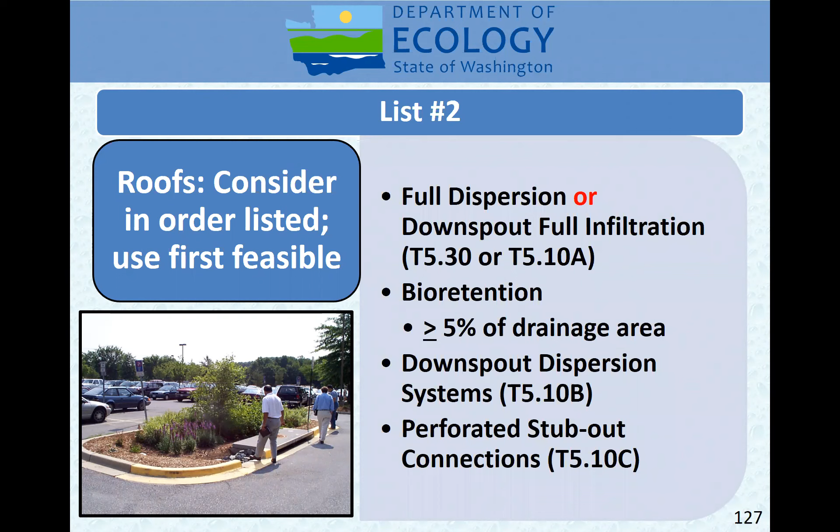But our answer for list 2 is we must do downspout full infiltration on the property to handle the roofs. We don't even get to the bioretention section there. And list number 2, other hard surfaces. We're not doing full dispersion, but we can do permeable pavement. Except, let's think about that for a minute.

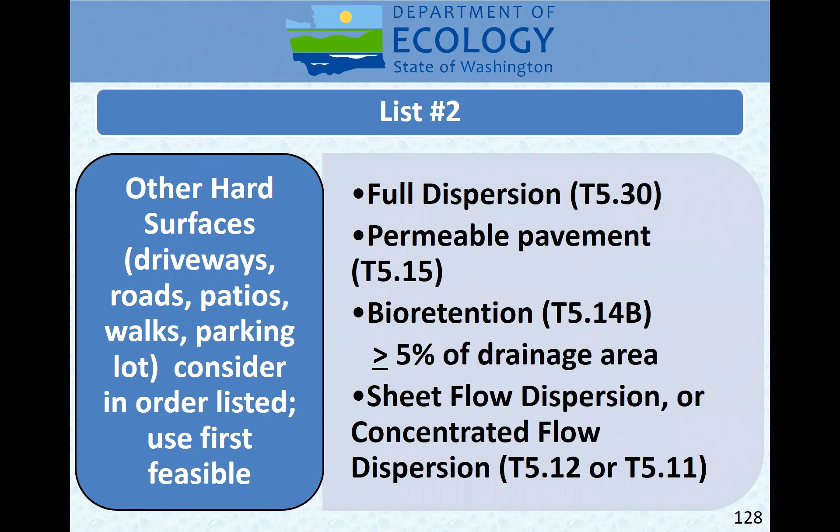Where native soils below a pollution generating permeable pavement do not meet soil suitability criteria for providing treatment, permeable pavement is infeasible unless the city wants to put a 6-inch sand layer below the permeable pavement to provide treatment. And the city has the right to decide whether they want to do that or not. And the city that I'm dealing with on this project says no. I don't want to put a 6-inch sand layer because I don't want to have permeable pavement.

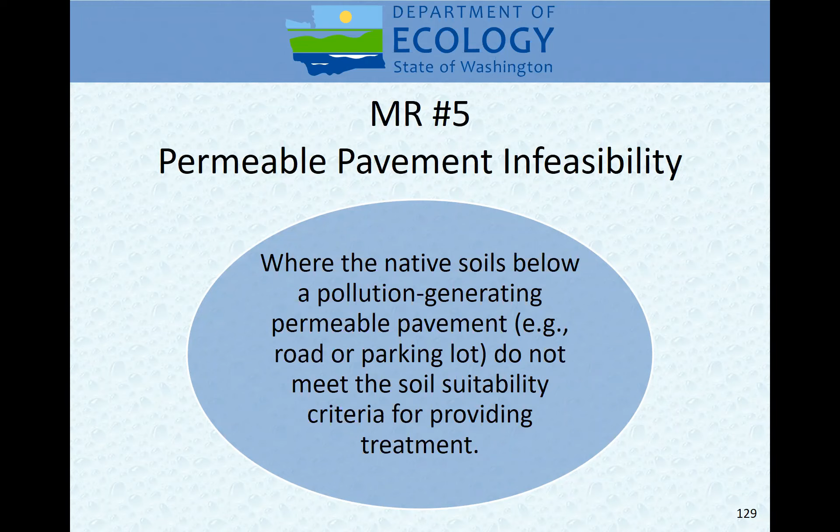So here's a way to get out of requiring permeable pavement. But that's only because the existing soils don't meet the soil suitability criteria, because water that goes to the permeable pavement needs additional treatment from the existing soils or a sand layer. So here's the way you might get out of doing permeable pavement in some places.

And so here's what I've got. I now have soil quality and depth, full downspout infiltration on the site, and street bioretention. So the runoff from the street's going to be going to bioretention facilities. I don't know how big those are going to be, have to size them. And the sidewalks have to be permeable pavement because that's not pollution generating. So the sidewalks need to be permeable pavement, permeable concrete.

Because you need to put the first item on the list everywhere it qualifies. That qualifies on the sidewalks because that's non-pollution generating. So I don't care about the ground below that being able to treat the water. But now I haven't taken care of the roads, so I have to take care of the roads with bioretention. I got to do both there.

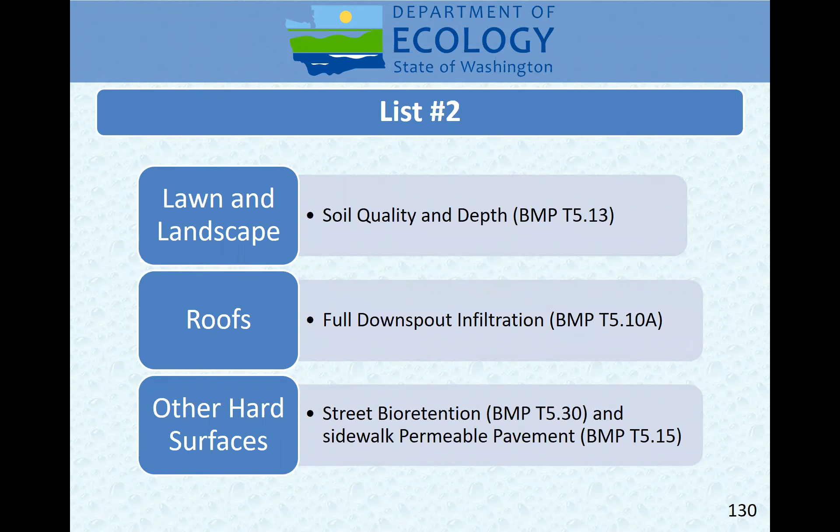So now I've got BMP T5.13, soil quality and depth. I've got 500 lineal feet of infiltration trench. I can do a little bit on each property, or I can direct it from each property to a long one that goes across the back of everybody's property lines, whatever.

I've got 462 square feet of driveways. I couldn't use permeable pavement there, it's pollution generating, so I have to take care of the runoff from there in bioretention. And so I'm sending the driveway runoff and the street runoff to bioretention, and I'm overflowing that to my infiltration pond.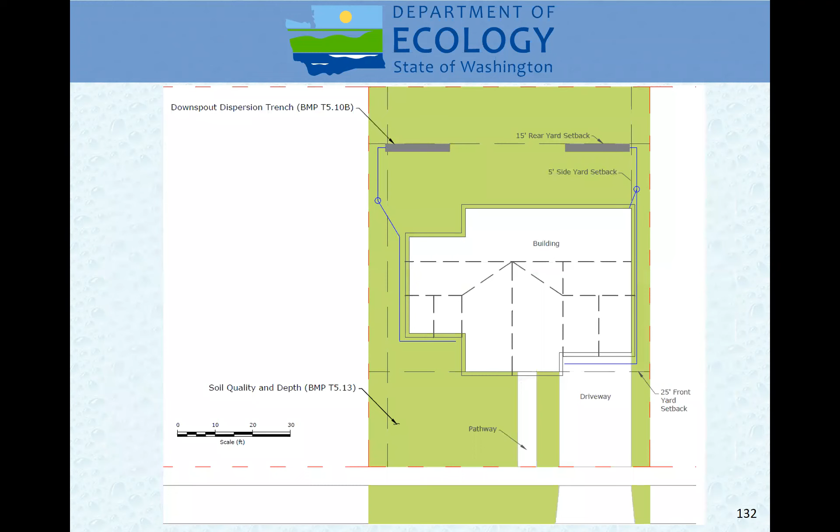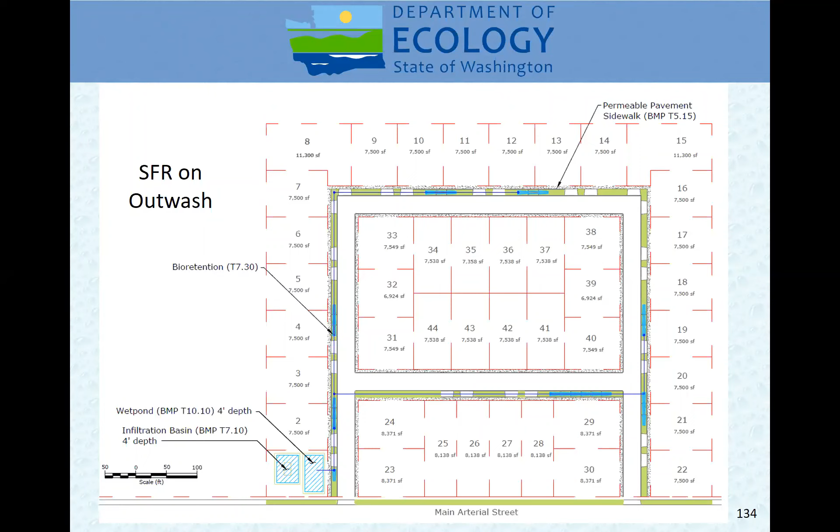So on my specific site, I have the dispersion trench in the back. I have AC driveway, and I have soil quality and depth everywhere. For some reason, I have that same thing twice. And so here's my site. I've got bioretention along the roadways. I've got permeable pavement sidewalks. And I've got an infiltration basin and a wet pond to do some treatment for me.

So I have 5,725 square feet of bioretention in my driveways. My streets are asphalt. I got porous concrete sidewalks. I got an infiltration pond and no discharge off site.

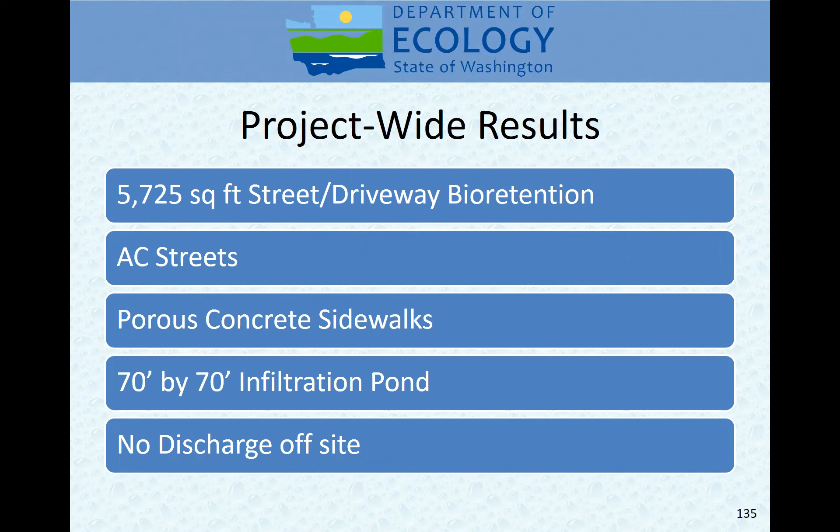So again, here's my little drawing. The roof goes to full infiltration. The lawn and landscaping go to the sidewalk. Overflows go to the roadway, and the sidewalk goes to bioretention. The overflow from that goes to the wet pond.

And I need a certain size of bioretention to meet minimum requirement number 5. The bioretention has to be 5% of the area draining to it. I could have more, but I need to have at least 5%. And so that's where this 0.130 acres of bioretention comes from. That's at 5% of the area draining to it.

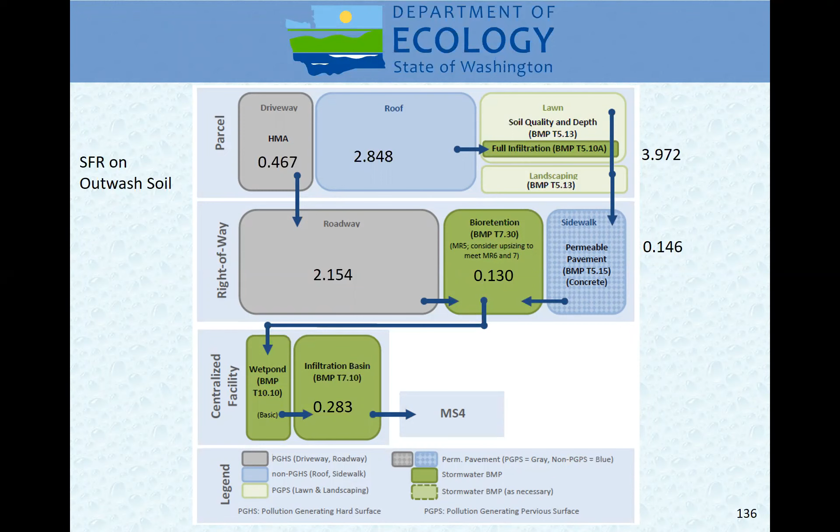And now here's my WWHM. I'm not going to go through the output. So here's WWHM with an infiltration pond sitting there, the sidewalks and bioretention and the infiltration trench and all that kind of stuff, and everything right there. And then when I run WWHM, this is what I get.

So I've met everything. What I've put in for minimum requirement number 5 deals with minimum requirement number 7 just fine. And if you look, it also deals with the LID performance standard. Look at this bottom line here. I meet the LID performance standard just as well.

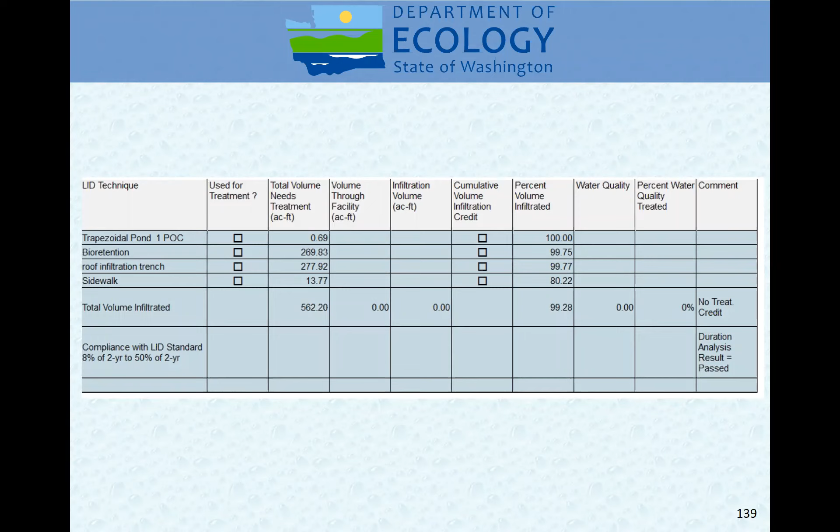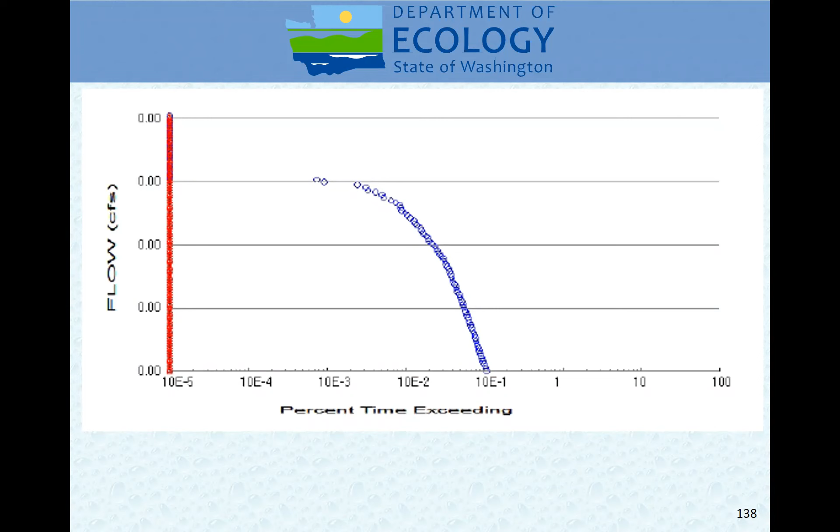Noticing on this one, I've got the 0.1%, 1%, 10% over here, and even at those flow rates, it's way back on the zeros. So I meet the LID performance standard just as well.

So let's look, do I need the infiltration pond? Can I get by without it? Maybe I can succeed there. Let's see if we can make something smaller. Well, no, I can't get by without the infiltration pond.

That's the interesting thing about minimum requirement number 7. The really big flows, really big rainfall events, have a really big impact on what you can do. They bypass really early, and so it messes things up. If you still need to have a pond, the pond doesn't need to be as big as I made it originally, but I can't get by without a pond at all.

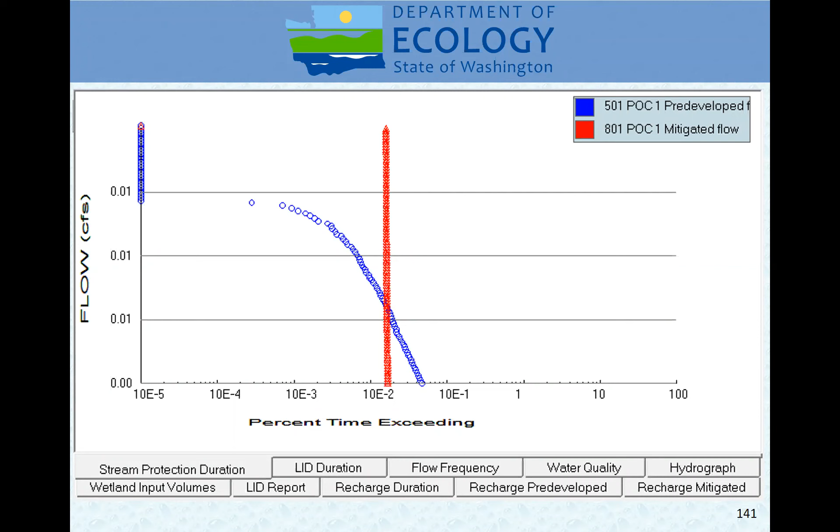Bioretention at the end isn't enough. There's not going to be enough infiltration through the bioretention that I've sized based on minimum requirement number 5 to deal with minimum requirement number 7. But if I make my bioretention larger, it's now much larger than I need to meet minimum requirement number 5, because I haven't met minimum requirement number 7. If I make it larger, I can meet minimum requirement number 7 by just putting that bioretention in, and I can take the pond out.

And so I ran the simulation, looked at bioretention, and I got 100% infiltrated through my bioretention. So little things can make a big difference.

My theory behind how to do stormwater design under our rules here in Washington State is... just a second, somebody just came to my door and I'm the only one home, so I'm gonna have to stop.

Sorry about that. It was a delivery. Somebody put something on the porch and rang the doorbell, and now my dogs are all excited about what's going on around the house. You may be hearing barks from them.

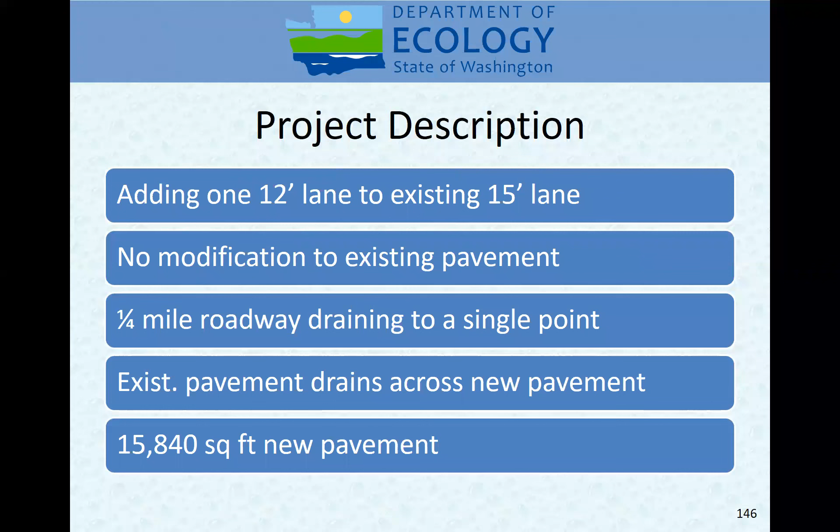This is going to be a redevelopment project, right? It's more than 35% impervious, so it's a redevelopment project. Let's go through the redevelopment project flowchart. I've got to apply minimum requirements 1 through 5 to the new and replaced hard surfaces and the land disturbed. It says nothing about existing surfaces.

Nothing. Now I continue on down, I answer yes to this 5,000 square foot threshold, and all minimum requirements apply to the new hard surfaces and converted vegetation areas. So what this is telling me is I have to do 1 through 5 for the new and replaced surfaces, and I have to do 1 through 9 for the new surfaces, not the replaced—not the replaced, at this point in time.

So now is it a road project? Yes, it's a road project. I'm adding 5,000 square feet or more of new hard surface. Now, do new hard surfaces add 50% or more to existing hard surfaces within the project limits? Well, it's 12 feet wide, was 15, now I'm adding 12, so yes, I'm adding more than 50%. If I was only adding 7 feet, I'd be less than 50%, but I'm adding 12 feet. So I'm answering yes there, and by answering yes, I have to apply it to the new and replaced hard surfaces.

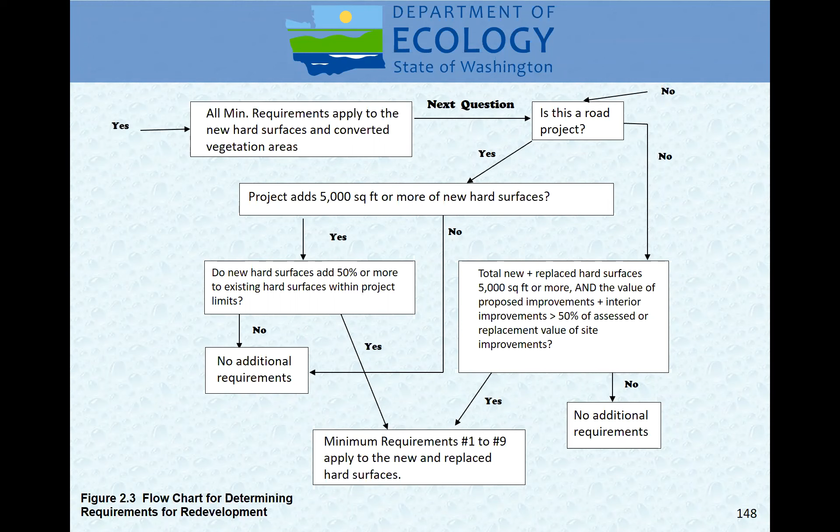So here's where things get sticky about whether you are keeping that as existing or replaced. Let's keep the existing pavement existing. So I have to apply 1 through 9 to the new and replaced hard surfaces, but I have 15 feet of existing surface and 12 feet of new surface, and that 15 feet of existing runs across the 12 feet of new. So I'm asking: what about the existing pavement that drains across the new pavement? How do we deal with that? I don't want to have to put in stormwater controls for all that existing pavement.

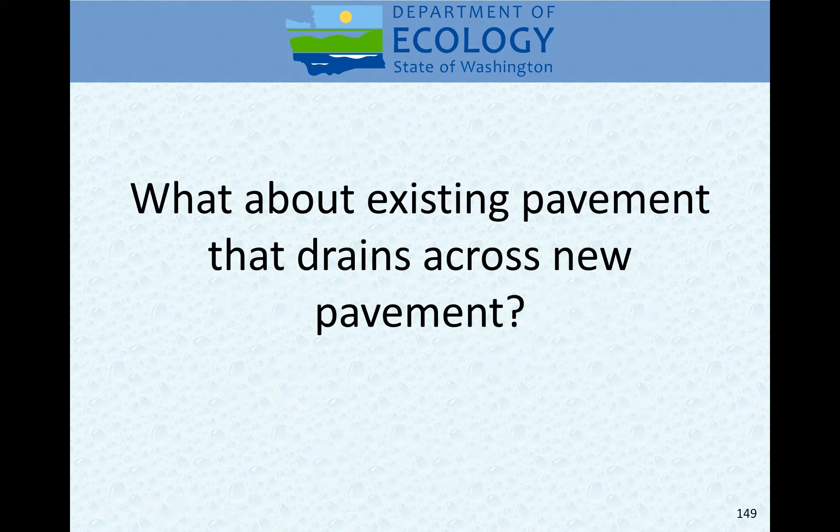Nothing in there tells me I have to treat that. Why do I have to do that? Well, we're giving you an out if the local government allows it. So the local government may allow the minimum requirements to be met for an equivalent, both flow and pollution characteristics, area within the same site.

That part talks about a development. So if you're putting in a new strip mall with some new pavement and some existing pavement, you can treat runoff from some of that existing pavement and not have to treat runoff from an equal amount of new pavement. It shows up easier when you're looking at a road.

For public road projects, the equivalent area does not have to be within the project limits, but must drain to the same receiving water. So what am I doing? I'm substituting existing pavement, runoff from existing pavement, for runoff from new pavement.

So I'm going to provide treatment to runoff from existing pavement, that 15 feet in the middle that runs across my 12 feet. That allows me to not provide runoff treatment for some new pavement, because I have to treat 15,000 plus square feet of new pavement. But if I treat 15,000 square feet of a combination of existing and new, I'm getting the same amount of treatment, right? So let's go look at what we have.

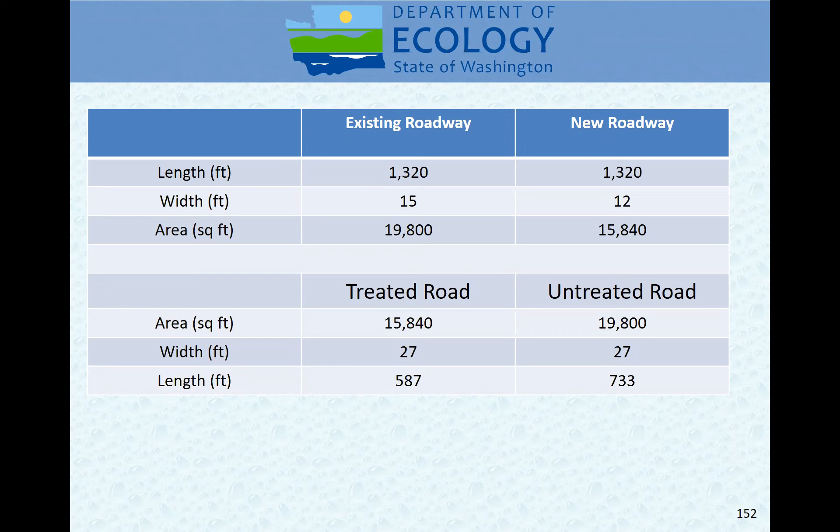Questions on that piece? And that's the whole thing, that was the last thing I'm going to talk about. So I'm here to answer any questions on everything we've talked about today. Let's see if anything shows up in the Q&A. So far it's quiet. Wow, we only lost 2 people.